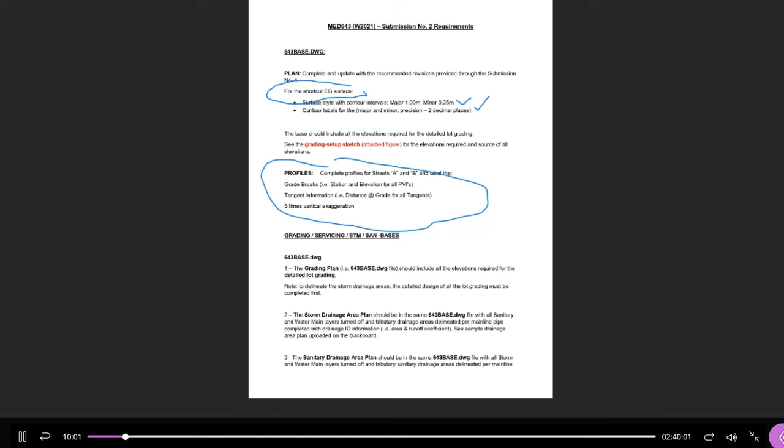So right now we're working on the profiles. So this part here, we're working on this part here together. So we're going to design the road profiles. This here, the shortcut for the surface, that's already done, and the style and the label style is given here. So when you send me your DWG again, I want to see the style for the existing ground surface, right? With a major contour interval of 1 meter, minor contour interval of 0.25, and then a major and minor precision of 2 decimal places. If you don't remember how to do any of this, you can go to the CDA reference files, okay? And that'll walk you through creating surface styles and surface label styles. It's contour label styles. You should be familiar with it, and if not, there's reference documents for it.

So right now we're in the middle of this, right? We're designing the roads. I did street A, I did part of street B, then I revisited A, and now I gotta go back and fix street B. So that's where I'm going to start today. So that's the requirement for the road design. The road design is going to lead to the grading design. We're going to get our front lot corners from a corridor model that we'll create from these finished profiles. So you have to do all the lot grading. The lot grading is important because of the drainage area plans, both of these plans, right? You have to draw the tributary area for each pipe, and I'll demonstrate that next week.

You have to draw the tributary area for each pipe. This you can almost do without the grading, although there is some information from the grading plan, really the profiles. You need the profiles done. So you don't need to do the lot grading for this one, for the sanitary, but you need the lot grading for the storm. You can't do storm drainage area plans without the lot grading.

Okay, so this you can do right now, actually, once we're done the profiles. So once we finish this discussion today, then we can do this. If you want me to show it to you today, if there's time, I will. Otherwise, you have to do the grading plan first so that then you can do the drainage area plan for the storm. Okay, so there's a little bit of order here that's required.

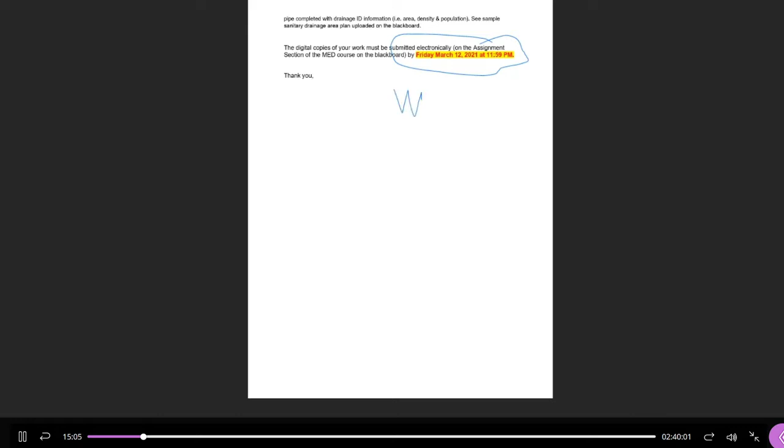Any questions about that so far? Just an overview going forward. Okay, and the due date is right there. Sorry, my mistake. Friday the 12th, which is week 9. Week 9. Any questions?

Okay, so let's get on to today's lesson. Again, I'm going to share my screen. Let me bring this up.

All right, so for the lot grading types, would you need to look at the corners to see if they're different? Do you mean like the flank lots, the ones that are against the roads, Steven? Well, you mentioned that most of the lot grading is the same. Yeah, most of it's the same. There's a couple of exceptions. I think there may be a couple of back splits, but generally they're all split drainers.

Okay. I'll do a little bit of demonstrating of the lot grading design, and I'll give you the parameters for it. Remember the setback from the front, the depth of the house, and so on. So we can talk about that once we get to it. But we're not there yet. We have to finish the road profile design.

Yeah, Claire, sorry, I haven't emailed you back. So if your alignment is short, right? This is what's happening with Claire. Sorry, I don't mean to single you out, but you asked me in class. So if your alignment stopped not at the street line, right? This is the right-of-way line.

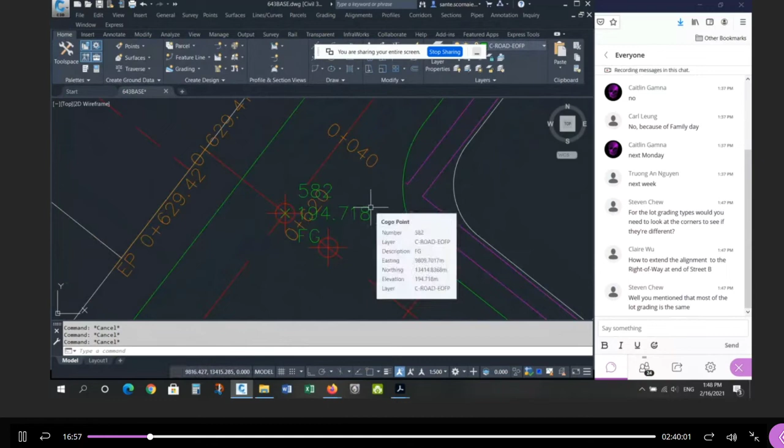Just click on the alignment, go into the grip. Don't touch the labels. Grab the alignment center line, go into the grip, and then INT for intersection. Take it to the intersection of the center line all the way to the street line, and that will extend the alignment, and that should give you the correct station at the end. Okay, that's how you do that, Claire. Sorry, I didn't want to email you. It would have taken me longer to explain it than to just show you, so I'm glad you asked in class. Okay, so try that.

All right, so let's go look at the design again. If you remember, I designed the road profile on Street B here, and then when I projected the design of Street B onto the plan and brought it to the profile of Street A, we found we were too short. We were too low, right? So this is what I designed. That's the elevation based on my work on Street B.

Right, so if you remember the low point, I designed the low point station. These are just the station values. So I designed the low point elevation, which is the point on the profile where this gutter extension is, the extension of the gutter. So I designed this location, and then I interpolated this value from the design, so I know the profile design along Street B, the elevation along Street B at this point is what you see there.

195.658. When I projected this to the plan from this profile, now I'm going to project this point to this profile, which is where we left off last day, and I find that the point is here. It's down here. Okay, that's for reference. There it is. I can't be that low, right? I want Street A to all flow from this intersection all the way to the exit of the site, which is down here, where Street A meets Legerway Drive.

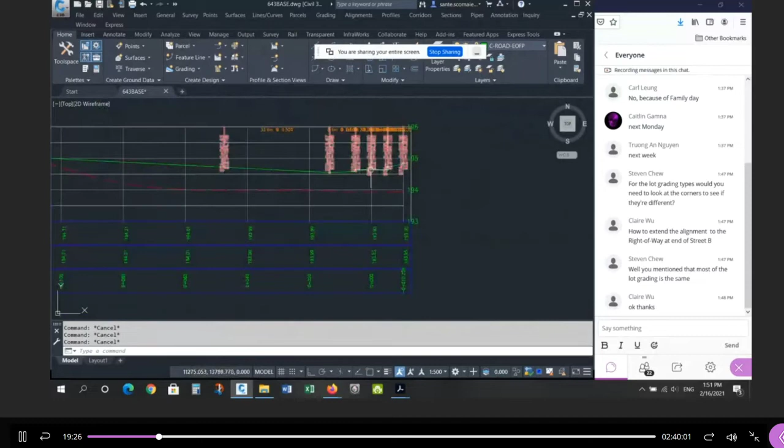We come down to the low point, to the end of Street B, and then all the way to Street B at this end. And we find as a minimum, this crown has to be up here. What I currently designed, it's close, but it's too low. If I lower this, I'm just going to trace this so you can see what I'm talking about. So if I draw a polyline from here to here and then just anywhere here, if I take this design and lower it down to here, node, then the only way to make this work is to have a low point.

Is to have a low point and a high point, right? So if I do this, just schematic, right? If I do this, then I can come down to here and then come back up and match this 0.5% grade, right? This 0.5% grade coming up. If I do that, then I have a low point. I'll end up with a low point here. And I'd probably place it strategically at this perpendicular at this station. So I could put a low point here.

So down 2%, down 0.5%, and then I would come up a 0.5% before I come down. So that would give me a high point here. I'd have a high point here. Whoops. Just want to label it. I'm going to have a high point here somewhere, a high point here somewhere. Oh, come on, sorry. I'm going to have a high point here.

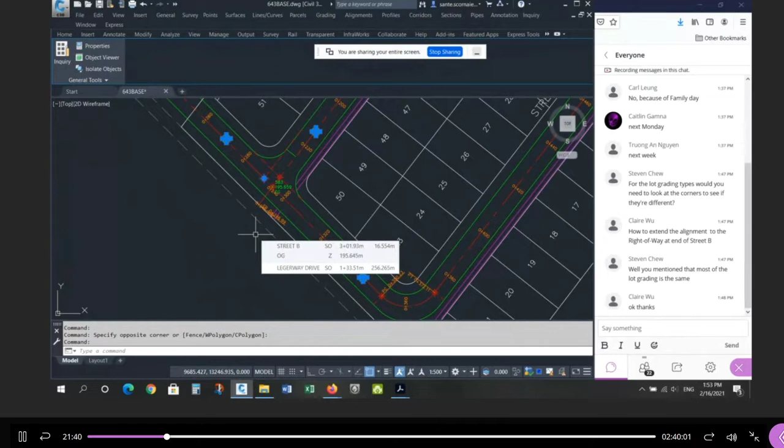So what'll happen when it rains during a storm event that the sewers are over capacity, I'll end up with a big giant puddle until the water gets to a level either higher than this point or this point. This will probably be higher than both of those 2 elevations. So I'm going to end up with ponding on the pavement when it's not necessary.

So if I start my design here and I come all the way up to the intersection without a high point here, if I get rid of this high point, then when it rains and the sewers are full, water will come down and around this way, and from the high point down and around this way, and I'll get positive drainage all the way out here. So I don't want to have an arbitrary high point here where I unnecessarily create ponding on the pavement. So I don't want to put a high point here.

So if we go back to the discussion here, I don't want to have this high point. I want to have it all draining from this intersection all the way down to here. So to do that, I'm going to start here. I'm going to go up at minimum slope all the way to the end. So as an absolute minimum, so that I can avoid the high point, this is the elevation of the road. So now this is too low. So now I'm going to go backwards.

And this is kind of a theme in municipal design. You did one part of the design, and then you're going back to make it all work together, and you find out what I did before on street B isn't compatible with what I need to do on street A. Okay, let's finish the design of street A. What should it be? Okay, it needs to be up here. So let's get rid of this. Let me project this elevation to the intersection, and then take that point in the intersection on the plan and project it to street B, and redesign street B to match this elevation, not the other way around.

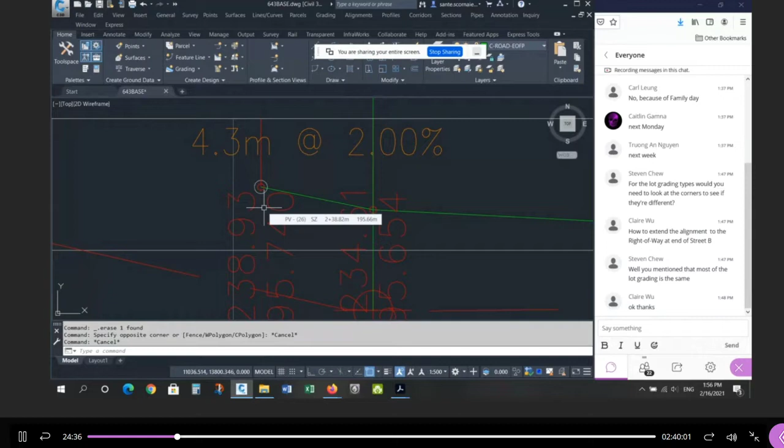Okay, so the process for taking that profile elevation to plan and then from plan to the other profile is this. We've looked at this before, right? So this is no good. This elevation came from this profile. I want a point elevation here from this road's profile. I'll leave this here for reference. You'll see the design from street A is going to be higher than this. So how do you do that? I'll show you. We go back to points, create points, and from this dialog box,

why is it being funny here? Points, create points. I don't know why my dialog box isn't showing. Let me try it from here. Same thing. My graphics kind of not working across here. Oh well, as long as the function works.

So we'll go back to this one, station offset. Pay attention to the prompts at the command line at the bottom. So which alignment? I want street A alignment. Which profile? The finished ground, the design, not the surface of existing ground. I'm going to say OK. I'm going to snap to the intersection of the two center lines. And then it's going to ask me for an offset. Just say 0. I want it right on the mark.

So this elevation that I produced now should be higher than what you see here. Okay, and there it is, right? 74. So instead of 0.66, it's 0.74. So it's almost 4 inches higher, or 0.1 higher, right? 0.08. Okay, so I'm going to get rid of this. I don't want to use that. So now that I have this elevation from this road's design, I'm going to project this to this profile. This I taught you last semester.

I'm going to raise the elevation of the top so I can get rid of these. See, these labels are in the middle of the two lines. You'll see here it's 197. I'm going to change the profile grid. So I'm going to go to Profile View Properties, to the elevations, and instead of 197, I'm going to specify that myself. I'm going to add 3 meters to this, just so the top of the grid is higher. All right, so now the labels are out of the way of what I'm trying to draft. Okay.

So the station location of the low point, this point here, is not going to change. So I still want my low point at this location. So this station is correct, but I want the elevation to match this. So from the low point, I want to come up this way at 0.5%, and from the low point, I want to come up at 0.5% this way.

One technique I like to use, and this is again a tip and a trick, if you will, is to trace this design with just AutoCAD lines and draw my solution using AutoCAD, and then make the design database match. Okay, so here's one way of doing this. So remember, from here to here is 10 meters. This is just interpolated on the intersection. So both this piece and this piece are at 0.5%.

Right, I'll show you here. They're both 0.5%. So from the low point, we're coming up 10 meters. And along the way, we're going to interpolate the elevation of the intersection. Okay? So I'm just going to draw a line from here to here. That's 10 meters long. Okay? What I want to do is move this from here up to here. That's where the design wants to be. Okay? Now on this side, I got a couple of choices.

So now I've got a couple of options. Let me draw a line here. I'm going to trace it, again, I want to draw my solution using AutoCAD lines, and then I'll make the database match. So I'm going to draw a line from this point to this point. So there's our 0.5% up, and then on this side, 0.5% down, right? So this is that high point. This is the curve between here and here, right? It's a little bit steeper for the gutter.

Okay, and then I drew this piece in between at 1.5. Why? Half, 1.5, a grade change of 1%. 1.5, a half, a grade change of 1%. I'm able to avoid a vertical curve. So now I've got a couple of options. Actually, there's more than one option. I'm going to draw that line so that I can have a 1.5% grade. I could raise this up to here and extend this 10 meters, right? I could extend and push this PVI. This PVI, I could push it to here and make this longer than 10 meters in design, right? That's one way of doing it.

Or I can leave this where it is and take this 1.5%, right? Draw it again, take this 1.5% and extend this. Remember this little 10 meter long piece? I can extend that to here and move this PVI and have something greater than 10 meters here. Okay, so there's a couple of options, right? Now, which is the preferred solution? There really isn't one. You can actually do anything in between, right? I can make both of these longer. This is 10 meters. This wants to be minimum 10 meters.

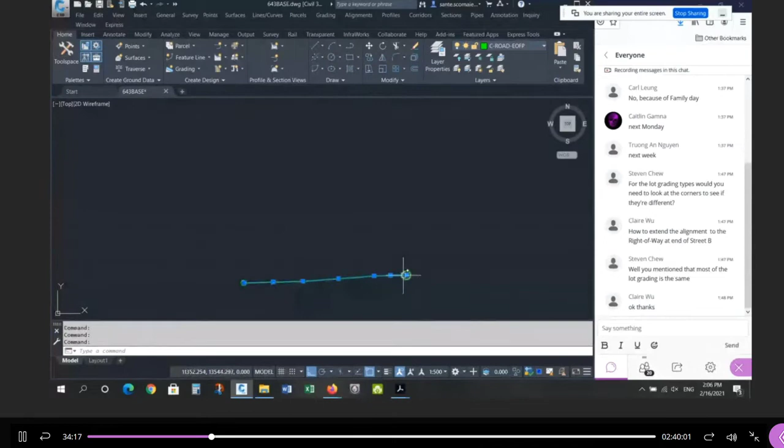This PVI here is going to move over to here. And then this can come up to here, node, and this can come up to the low point to match. Oops, did I do it wrong here? Oh, yeah, this needs to go here, node. Okay, so there we are. So now we have from the low point all the way to here is 0.5%, and then we come up 1.5. So the sum of this and this is more than 10 meters. Okay, so that's the design on this side.

Now on this side, I got to fix this again. And I'm going to do here exactly what I did before. I'm going to come up at 0.5%. So I'm going to trace this. This is 0.5%, right? I'm going to start here and go all the way to here. I'm going to mirror it because this is positive. I want it to be negative. So vertical mirror. Oh, where did it go? Sorry, I scaled it. This line here, I'm going to trace it. So from here to here is 0.5%. I'm going to take it and mirror it to the other side.

Now it's negative. And then I want to fillet this 1.5% grade and this 0.5% grade, right? And now at this PVI, I have 1.5 positive, negative 0.5, a grade change of 2%. So now I have to play that game that I played last day, right? I'm going to make a copy of this and this. This is a PVI with a grade change of 2%. So I'm going to put in 10 meters at 0.5%, this piece here. Right? So this is something I demonstrated last week, but I have to do it again.

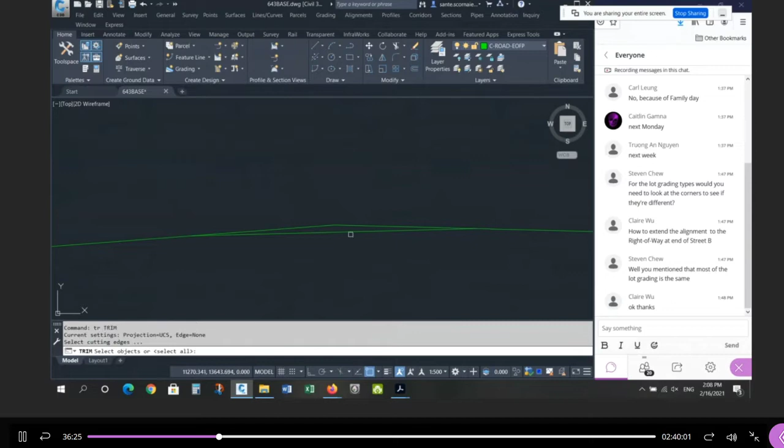Okay, so I'm going to take this one here. I'm going to take this one here. I'm going to fillet it with a radius of 0, 1.5 to negative 0.5. So this PVI has a 2% grade change. This PVI and this PVI has a 1% grade change. Okay, so now I want to put this in relative to these two positions up above. So I go back up here, and I know where this one crosses this one, right? Because I've traced both of them.

So now I'm going to take this from this PVI to the same PVI up here, and that's where my design should be. So now I'm going to take this one and bring it up to here. This one will be over here, and that's it. Don't need this anymore, don't need this anymore.

And there we are. 10 meters between positive 1.5, positive 1/2, negative 1/2. So now I've transitioned. So I moved the high point on this side a little bit. And now I have an elevation that's the same at both intersections. And now my road profiles are done.

Okay, so a little bit of back and forth. Again, it takes a little bit of getting used to. A lot of people don't like the idea. When you're used to doing a problem in math or even in steel design or whatever it is, you kind of start your design, especially if it's hand calculations. You start at the top of the page and you work your way down and you get to the end and you're done and you're happy and everybody's cool.

This kind of work, because there's so many moving parts, because there's so many pieces that have to work together, you can advance the design on one front and find that on another piece of the puzzle, it's not compatible. And it is an iterative process. And I've said this before, municipal design is an iterative process. And you'd like to iterate once, which is impossible.

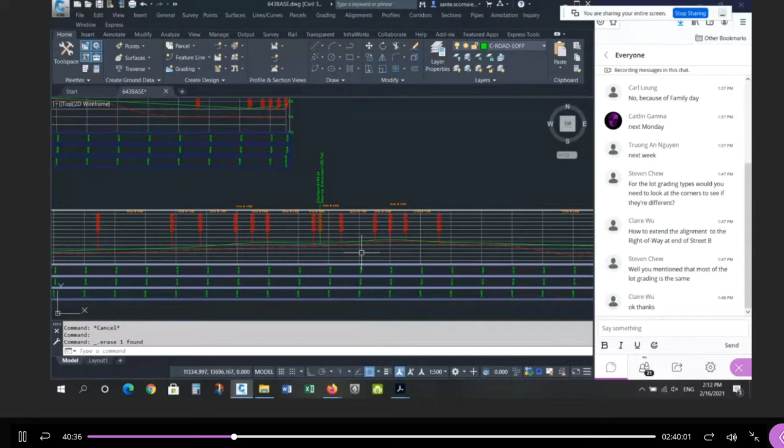So sometimes you get information related to stuff that you thought you knew, and then it turns out you didn't. One of the assumptions I'm making is that this road is built exactly as the design. I'm assuming I'm designing my road against the design of the previous road. Well, this is built now. I hope they built it in the right spot. So sometimes you go back and say, okay, you know what? It turned out that road was actually built 4 inches lower than you thought.

So now I have to go back and revise my design and so on. So there's always information that comes to light, not just the design process, right? There's that part of it, but there's also new information or updated information. You might get a brand new topographic plan with more data and so on. So there's always stuff that's going to make you revisit, yeah?

Until the current data set, everything's up to date. You have all the information you need. Sometimes you start the design not with everything you need, and then you'll appreciate that iterative process. So sometimes there's things beyond your control, and sometimes there's things that you're in control of, but you haven't gotten to that stage of the design yet.

Okay. Any questions? There should be lots, I hope. And again, if you want to unmute yourself to ask a question, you can. You should be able to ask the question instead of type. Claire, were you able to fix that?

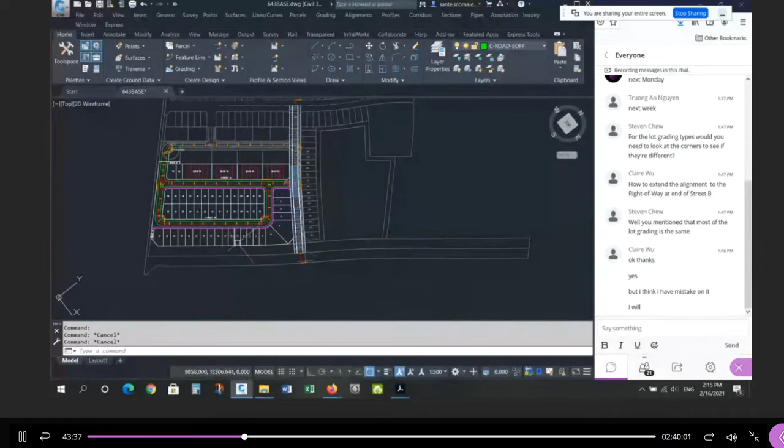So just the same way you splice in the elbows, you can add baselines of other roads or other alignments, more specifically. So I'm going to take this, right click, go to corridor properties, and you'll see in the parameters one baseline. This is called the baseline, where you identify the horizontal alignment and the vertical alignment. And then if you click the plus sign, you'll see the region. That's where you define the cross section. Okay, so you need plan, profile, cross section. So before we add any roads, I need a new cross section.

What's the right-of-way width for our road? Anybody remember? What's the right-of-way width for street A and street B? If you don't remember, measure it. Yeah, 16, right? So I don't have a cross-section with a 16-meter right-of-way, so I'm going to create that. Remember, you need a plan, profile, and cross-section. I don't have cross-sections representing street A and B. So I'm going to go back to my plan view, and I'm going to go over here.

So if you remember, this is the 20-meter wide section that I prepared for Legerway Drive. Okay, I'm just going to cheat. I'm going to borrow from here, right? I'm going to make sure that I have the alignment, the cross-section I need. So under MED, under project files, under Town of Milton, standard, E2, right? So I want to do all this. I want to create my cross section like this, right?

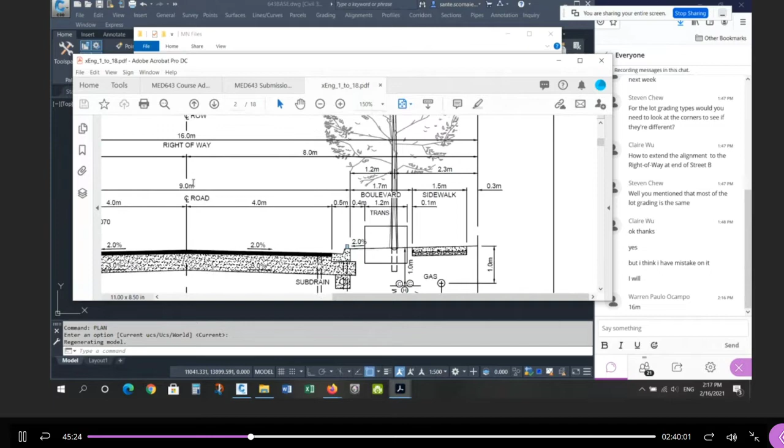4-meter wide pavement. The gutter, remember, is going to be 0.3, 0.05, 0.15, 8.33%, 300%, 0%, and then the rest is all boulevard. And you'll notice this boulevard width is going to be: this is 16, divide by 2 is 8, subtract 4.5 from 8 is 3.5 boulevard. All right, so back to here.

So I'm going to make a copy of this. Now when you copy this, only copy the assembly point, not the sub-assemblies. This is the assembly. All the pieces connected to it are sub-assemblies. So you just need to copy the assembly. The sub-assemblies will come with it, so you don't need to worry about those pieces, okay? So don't copy everything. If you do, it causes a bit of a mess, okay? So just copy the center point. I'm going to bring it over here near street A, and you'll see all the assemblies come with it, okay? If I change these, the pavement has to be 4 meters on both sides.

The gutters are the same. The gutters are 0.3 at 8.33%, 0.05 at 300%, and then the top curb is 0.15 at 0%. So that's the same on both sides. And now I just need the boulevards.

These should both be 3.5, 3.5, up at 2%. And then if I measure the distance from this endpoint to this endpoint, I should get 16. This is my check. That's good. So I know that I've modified this correctly. And then when I click on the assembly point, I'm going to change this to 16 meter right-of-way.

So now I have two cross sections. They both have pavements, they both have gutters, they both have boulevards, but I've changed the width of the pavement, the asphalt portion, and I've changed the width of the boulevard. So now I have a plan for street A and B, a profile for street A and B, and a cross section that's going to be used for both street A and B. Okay, let me go back to my plan. So again, this is a bit of review from last semester. Creating your corridor.

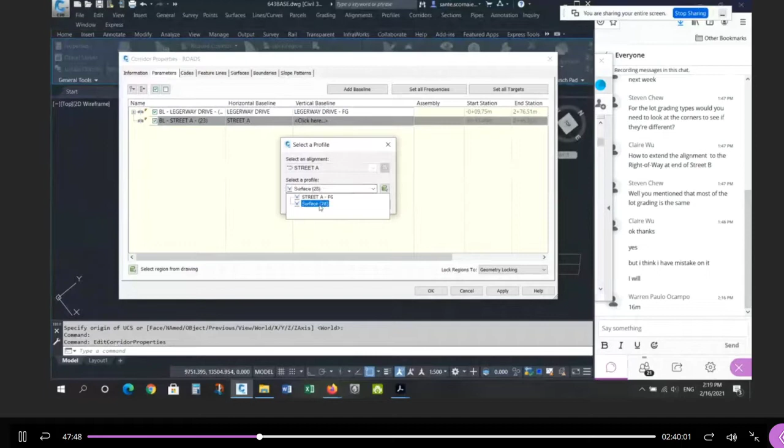Then where it says click here, that's where you take the design profile. Remember, there's always two. This is the existing ground. This is the proposed ground. This is the red dashed. This is the green one, the design one. Say okay. And then to add a region, notice there's no plus sign here. You right click and you say add region. And then you take the 16 meter right-of-way and say okay. And that's street A. I'm going to say okay, but we got to come back for B.

Rebuild the corridor. And now you'll see the corridor for street A. Street A and Legerway Drive together, one corridor model. Street B is done the same way. So we click on here, right click, go to corridor properties. You know how when you have here a choice between FG and surface, if you don't like the surface, you want it to say EG or existing, this is where you change that.

Some students have asked. If you go into tool space, under alignments, under centerline alignments, under Legerway Drive, not the view, that's the grid, the profiles, these are the actual data. Here's where you can change the name. So if you don't like FG and surface for existing, you can go to properties. What I do is this: I go to here, properties, I copy this, Control C, cancel, I go to here, properties, paste, and make this EG. And now I have both.

So be careful. If you change the name, make sure you choose FG for the corridor, not EG. It's a common mistake. Same thing here, profiles, properties, Control C, copy, change the surface property and make it EG. And do the same thing for street B. It's just housekeeping information here. I've got 2 for some reason. I'm going to delete one. Doesn't matter. Existing ground. I must have done it twice.

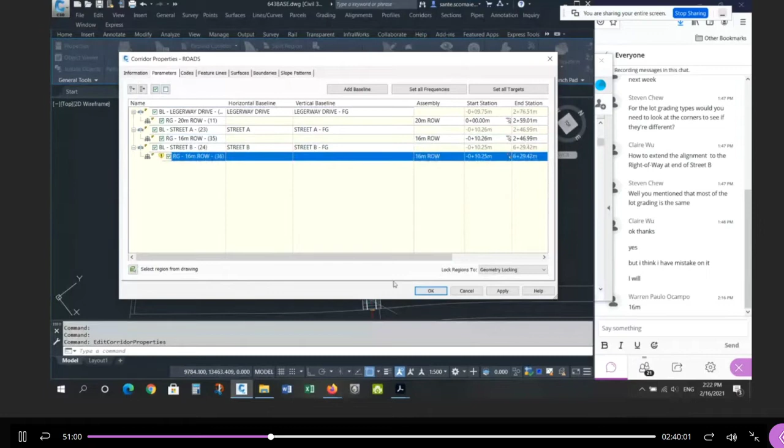And then right click, add a region. And you've got your 16-meter right of way, right? So now you have 3 roads, 3 alignments, 3 profile designs, and 3 assemblies with sub-assemblies. A 20-meter right of way for Legerway and a 16-meter right of way and a 16-meter right of way. Say OK. Rebuild the corridor, and now you have Street B connected.

Okay? So more housekeeping tools. Again, I'm going in and out of this dialog box. You can do everything all at once. Okay? The only time you have to go out and come back in is when you're splitting the regions, which we'll get to in a little bit.

Okay? So you can see here in the corners, they don't look very curvy, right? They don't look very representative of a curve, so we have to go back and change the frequency. So we'll go back to corridor properties and we set all the frequencies. And again, all the tangents should be 3 meters long minimum. Every 3 meters you want cross-section data, and then the curves every 1 meter.

The last 2 for this design are redundant. We don't have any spirals, we don't have any vertical curves, but horizontal curves is going to be important. I'm in the habit of changing this to 3, 1, 1, 1, whether I have spirals or vertical curves. Say OK and watch what happens in the corners. It's going to look more like a curve. Now, even though they're straight lines, it looks more like a curve.

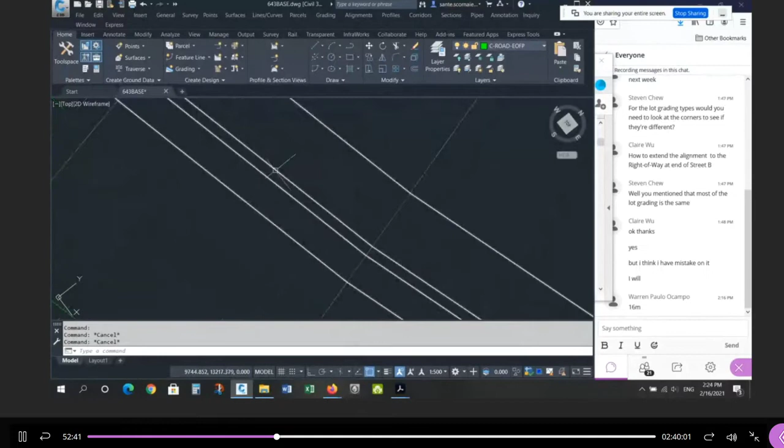And that's also true here, right? The pavement is here. It's actually on the alignment over here. On the corridor, it's out here. So this should actually be right here. Same thing in this corner, okay? So it's not as big a bulge as you saw in Richmond Hill, right? Where it really curved out, where it was obvious. It was really pronounced. Very subtle in Milton, but you still have to deal with it.

I'm going to demonstrate 1. Okay, there are 3. 1, 2, 3. There are 3. You only need to do 2. These 2, the ones inside the site. So you could ignore this because we're not doing any lot grading there. So you don't have to fix this. If you want to, you can, but it's not necessary for the design.

Because remember, all our work is happening in here, right? This is the property line. So this doesn't really need to be up to date. Although, if you want to change it, you can. It's up to you. Okay. You only need to fix these 2. I'll demonstrate 1, and the other one should be a similar procedure. Okay, any questions so far?

Okay, so what I'm going to do next is review. The geometry is different. What I'm about to do as a process is exactly what I taught you last semester. Okay, so before I do that, I need a horizontal alignment for the gutter. I need a vertical alignment for the gutter, and I need a cross section for the gutter. Okay, so let me build those Civil 3D components next.

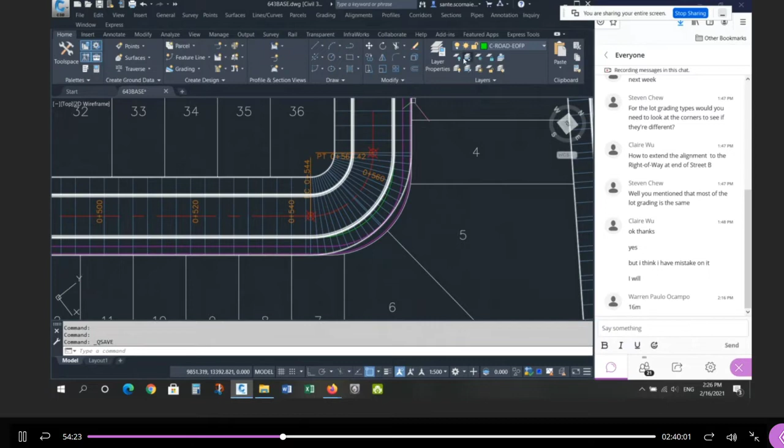Okay, so the horizontal alignment, I'm going to freeze the corridor temporarily. I don't want to see this. So I need an alignment that goes from this dot along the green line to this dot, because that's the zone where the widening is. Okay? Everything over here is typical, and everything on this side of the curve is typical, but everything between these 2 points is where the widening happens.

Okay? So the bulge is on the outside of the turn. This is typical. Between here and here is a constant offset. From here to here, it's widened. It's very subtle. So I need an alignment along the green line. This is the advice I gave you last day. Don't create a horizontal alignment that starts exactly at the beginning and at the end of the widening zone. Make sure you start a little bit before and you end a little bit after.

Okay? Now, because my chainage is increasing in this direction, follow my cursor, right? This is 520, 540, 560. I'm going to have 0 at this end, and it's going to increase in the same direction as the center line, okay?

Just so it's consistent. It doesn't matter, but it's easier to see if you're going the same way. So let me draw a polyline. I'm going to turn my O-snaps to endpoint. I'm going to draw a polyline, not at this point, but just before. So I'm going to use my near O-snap, near. So don't start right there, a little bit before. Doesn't matter, don't go too far, but a little bit before.

Then I'm going to go to the end here. I want to mark the spot. This is redundant. You don't need this spot. Okay, so if you don't want to put one there, you don't have to. So I'll skip it. So I'm going to go to the beginning of the curve. Now this is a polyline. I want to go around the curves, A for arc. And I go to the end of the curve, and then L for line. And I go not to here, but beyond. So near point, beyond. So now I trace the gutter, but it starts before the zone and it ends after the zone.

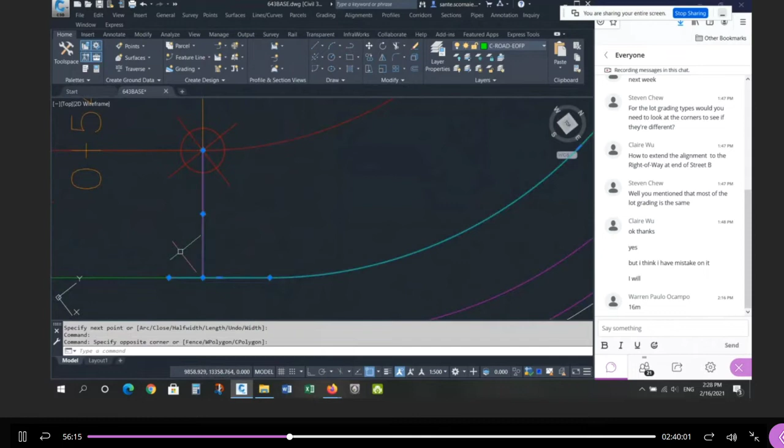Okay, and this is part of what I used to say last semester. Remember, if you have an open net, never aim for the post. You want to do all your profile work well within the limit of the horizontal alignment. You want the horizontal alignment limits to be greater than the profile design within it. You don't want to design them at the edge. You want to be inside. Okay, so that's the alignment of the gutter.

Okay, so I need to create an alignment for this. You have to do the same thing here. Now, here's my naming convention, right? If you start at the beginning of the alignment, there are 1, 2, 3 crescents. So this is the third crescent. So this is going to be street B, crescent 3, and is it left or right? Is this alignment left or right of center? It's on the right side, right? From the center line, if I look in this direction, this is the right side of the road. Okay, so that's the naming convention.

So whatever this alignment name is, it's called street B, copy. So here's the alignment. Alignment, create by polyline. Pick this end. I want 0 at this end because I want positive chainage to increase in the same direction as the center line. Enter. That's correct. See that little indicator, that little arrow? Enter. The name is going to be the horizontal alignment name, crescent, or elbow, or knuckle, or eyebrow, whatever you want to call it. It's the third one from the beginning of the center line alignment, and it's on the right side. Okay? The other ones will be named crescent 1 on the right, crescent 2 on the right. Okay?

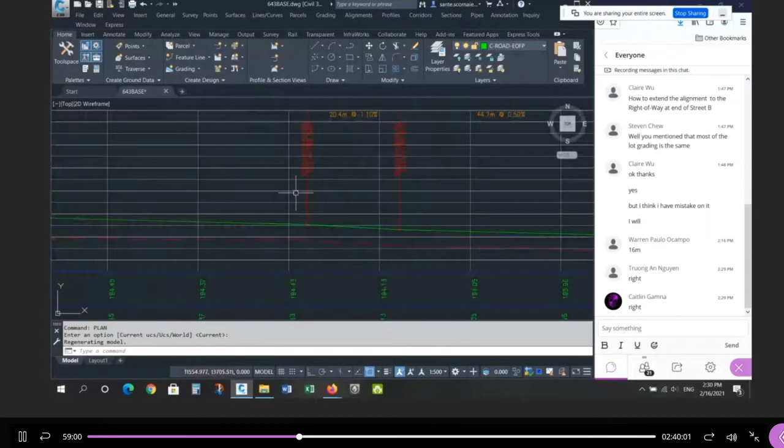So now I know that that elbow on my street B profile is right here, right? This is the last one. There's an elbow here just before the high point coming into the site. There's an elbow here near this high point, right? There's 2. So this is my elbow and this is the elbow I'm working on. There's 2 elbows inside the site. Here's my layout procedure. Don't need any of this crap here, right?

Here's my layout. I'm going to draw my profile. I'm going to assume this is my center line. So anything that's on the right side of the road, I'm going to draw at the bottom. Anything that's on the left side is going to be drawn on top. So now I'm laying out my, and I'll move this for now, right? I'm going to lay out the position of my profiles in a relative way so it's easy to find.

Okay, so this is the center line zone where the widening is, where the elbow is, right? So the bottom of this main road is going to be anything on the right, and above is going to be anything on the left. And then I stay organized.

You can put them wherever you want, but if you lay them out relative to each other in a way that's easy to kind of follow, it makes more sense. So I want to draw the profile of the existing ground of that alignment I just created. So we go to Profiles, Create from Surface. This time I want the crescent. I want the existing ground, add that. I'm going to change the style so it's existing. I get that red dashed look.

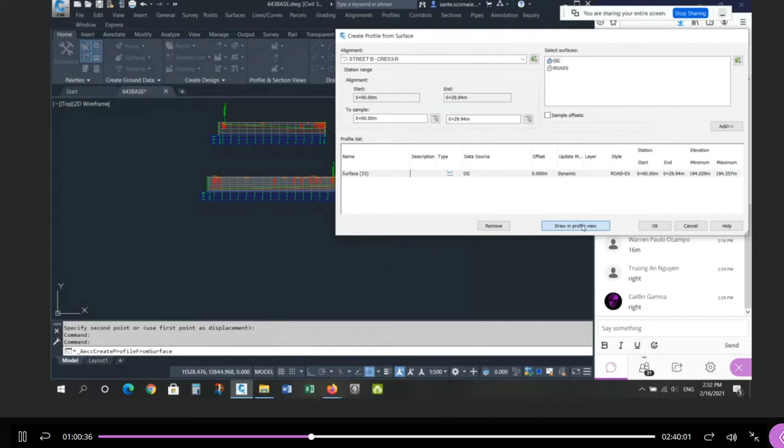And I'm going to draw in the profile view, and this is going from left to right, so I'm going to use left to right for this one as well. Create the profile view, and I'm going to put it directly below here. So there's the existing ground through the gutter. Okay, I don't need these white labels. You get them by default. So that's the existing ground.

Now notice the distance from here to here. I'm going to project down. I'm going to draw a line from here straight down. And I'm going to draw a line from here straight down. And if I take this and I move it from here perpendicular to here, you'll notice that the length along the center is shorter than the length along the gutter, which is exactly what you expect. Right? The gutter length is longer than the center line length. And that's why the center has to be steeper than the minimum gutter grade.

Right? So this is the run for the slope along center, and this is the run for the slope along the gutter from here all the way to here. This is the run on the gutter. Okay. Now I need to project a couple of points from the plan to the profile. Before I do that, I need to have a preliminary sense of what the design surface is for the road. Right. So I need to create the road for the corridor model, which I haven't done yet.

Right. So because it's frozen, I'm going to go back to Tool Space, Prospector. I'm going to go to the corridor, right click, go to Properties. I want to create the surface for the road. Okay, so if you haven't done this yet, I think we did already, but if you haven't done this yet, this is how you create it. Let me recreate it from scratch. I'm just going to delete it, right? So the first time you do this, there's nothing there.

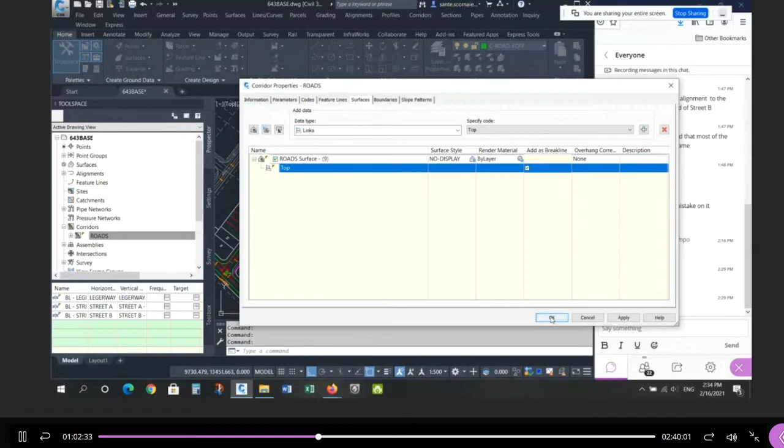So it's 2 buttons. Click this first button, that creates the surface. Click this plus sign, that adds the data to the surface for building. Okay, and use them as break lines. Say OK. Rebuild the corridor. And now you have a surface from the corridor. If we want to look at it, it looks like this. Right, this is the corridor now. Here's Legerway Drive, here's Street B, and here's Street A through here. So keep that surface in mind. Let me get rid of the view. I'm just going to make it no display.

Although the surface is incorrect here, at the beginning and at the end at the gutter, the elevation is correct. So this point here, I'm going to put an AutoCAD point here. And this point here, this is the position on this alignment, this position on this alignment. These are the 2 stations of the beginning and the end of the profile design of the gutter. And the elevation for these 2 points comes from the current road surface. Everything between these 2 points along this alignment is wrong, but at the beginning and at the end, they're correct.

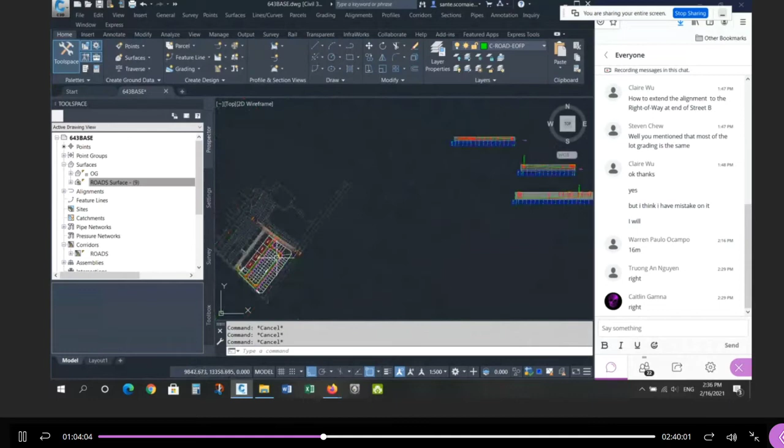So I'm going to project these 2 points to the profile of this alignment, and the elevation of these 2 points are going to come from the road corridor surface model. And that is the station elevation and the station elevation of this gutter profile. And magic should happen. Well, not magic, you did it on purpose. That design profile of the gutter should be steeper than what? Remember the value of what the gutter needs to be as a minimum?

0.75%, exactly. So when we see this profile and its design slope, it should be steeper because we rounded this number up a little bit, right? It should be steeper than 0.75%. So when you see that, it verifies your design is correct for the center line, and it should not be a surprise. If it doesn't come to be a little bit steeper than 0.75, you know you did something wrong here. Okay, so it validates what your design for the center line should be, because now I should see something at least 0.75%. So let's do this.

So we're going to go to project the points. So take this point and this point, enter, bring them over to the gutter profile, click, and now don't accept 0. Set the elevation from the corridor surface. Say OK. And now you've got the 2 points of reference that represent station elevation, the 2 PVIs for the gutter. Let me get rid of this. So all you have to do now is create a design profile that connects those dots.

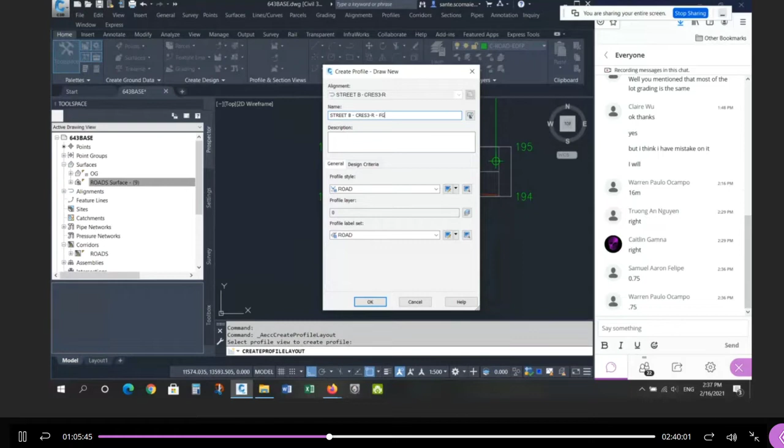So we go to Profile, Create Profile from Layout. I'm designing it. I want to be in charge of what that design is going to be, not the surface, but the layout. Click on the grid, give it a name. So I'm going to give it the alignment name, which I cut and paste from before. FG, the finished ground of the gutter. Say OK. You get this dialog box. We're going to take this PVI generator.

I'm going to start here, node. I'm going to go to here, node. And when I hit enter, you're going to see the labels. Okay, and I'm not crossing my fingers. I expect to see 0.75%, a little bit steeper. And there it is, 0.8%. So that's not a surprise. That's what I expect, because I know I designed the road correctly on center in the profile above.

So now I have my horizontal alignment for the gutter. I have my vertical alignment for the gutter. I need a corridor, an assembly with subassembly parts. So now you have to remember the alignment in the plan, what it represents. And if we go back to the standards, so far, right, this is E2. So far, I built 2 assemblies where the reference point is the crown of the road, right?

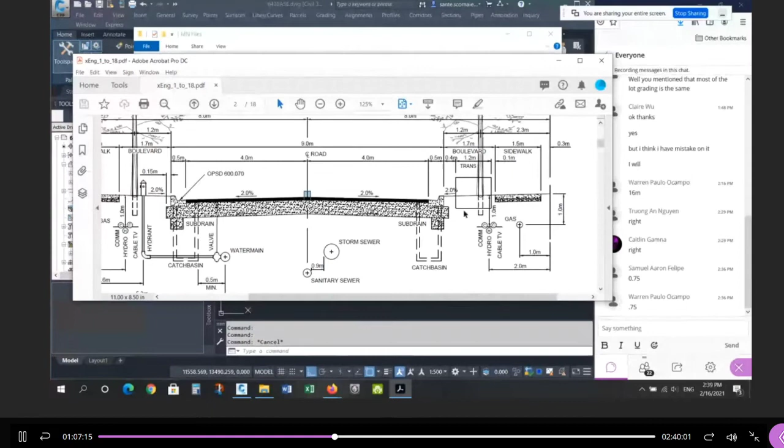Now, the alignment that I drew on the gutter represents this position right here. So I need to build an assembly with sub-assemblies that have an asphalt pavement and a gutter line on one side of center, and then a face of curb, a top of curb, and a boulevard on the other side of center. This is the reference point now, not the crown. Okay, and there's an option. I can use this reference point for the gutter, or I can use this reference point for the gutter, right? Do I put the asphalt on the right side of the gutter or on the left side of the gutter?

Any ideas? Do I build it the right side or the left side? Is the boulevard going to be on the right of the gutter, or on the left side of the gutter? And the reason for that is this. Remember this? The direction of increasing chainage is this way, which means this boulevard is on the right side of this alignment, right? So I'm going to be creating it to look like this, not this. If the chainage was 0 at this end, increasing in this direction, then the boulevard would be on the left. But I'm going this way, so I need the boulevard on the right.

Okay, so you have to be consistent. You have to make sure you know which is the left side, which is the right side, which is something you know in highways, right? Left and right side of cross section, how it's defined. Stand on the road, look in the direction of increasing chainage. Your right hand is the right side of the road, your left hand is the left side of the road. We teach you that for a reason, because now it comes into play. You need to know that this boulevard is the right side of this alignment based on the chainage increasing in this direction, from top to bottom.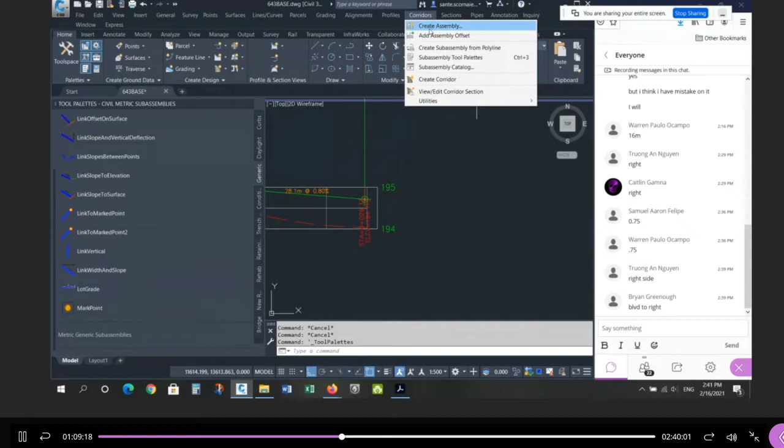So I go to corridors. I go to create assembly. Give it a name. This is going to be called Gutter Boulevard right. Okay, I can't spell gutter, sorry. Say okay, pick a point, it's going to zoom in on it. Okay, so now on this side I'm going to have gutter and pavement. So I'm going to click on link with slope.

On the left side, I'm going to have a 0.3 meter wide, 0.3. Try that again, sorry, link with slope. Now, if it doesn't let you change this value for some reason, this is a hiccup we've had before. This should be 0.3. If it doesn't let you type in here, and it's not letting me type in here for some reason, just accept it. Just draw it and make sure it's on the left side.

So I'm going to draw 2 on the left. 1, 2. They're both wrong, but I've got 2 pieces. Now I can go and revise them. I don't know why that's not working all the time. Some of you may have experienced that as well. So this piece is the gutter. Now I can go to change properties, and now I can actually change the parameters in here. So it's only supposed to be 0.3 wide.

And is the slope positive or negative? 8.3333. Is this positive or negative? It's going to be positive. I'm coming up out of the gutter. So this has to be positive. So there's the gutter. This piece here, I'm just going to change the width to 1 meter. And I'm going to leave it at 2%.

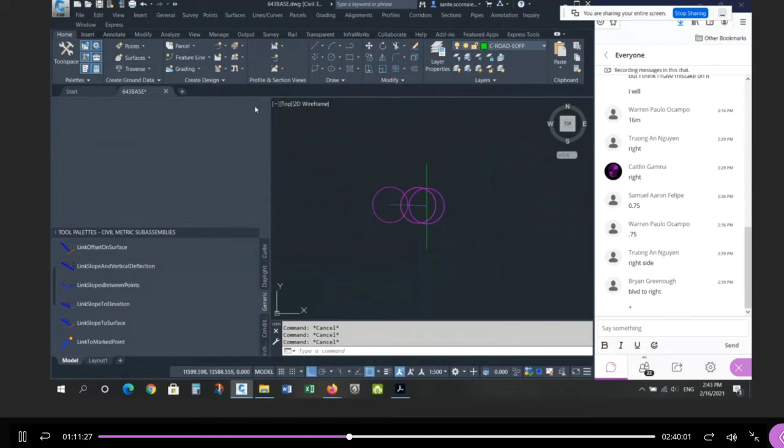And the other thing I'm going to do with this piece is I'm going to change the name. I'm going to call this pavement. And that is the needle in the haystack I need to find later for targeting. Okay, so that's the only one I'm going to change. Now I need the right side, so now I use this again, link with slope, change this to right. But it won't let me type. I don't know why. It won't let me type the number, so just produce it.

I need the face of the, whoops, drew it on the wrong side. Do that again. It needs to be on the right, but it won't let me change the width. So just produce it and then revise it. Don't pick the cyan circle. Start in the center of the road. So 1 there, now pick the last circle on the right. So I need face, top, and boulevard. Face of curb, top of curb, and boulevard.

Don't need this anymore. Change properties of this. This should be 0.05. Now let me zoom in so you can see it happen. 0.05 wide. And the slope is 300. That's the face of the curb. This is the top of the curb. It's only 0.15 wide. It's perfectly flat, 0. And then this is the boulevard, which should be 2%.

At 3.5 meters, same as the typical boulevard, right? Same as this boulevard on a 16-meter right-of-way. 3.5 meter boulevard. And now my reference point is right here instead of the center of the road. The green line is now here on this assembly that I just built. So this should have been 3.5. Let's just check it again.

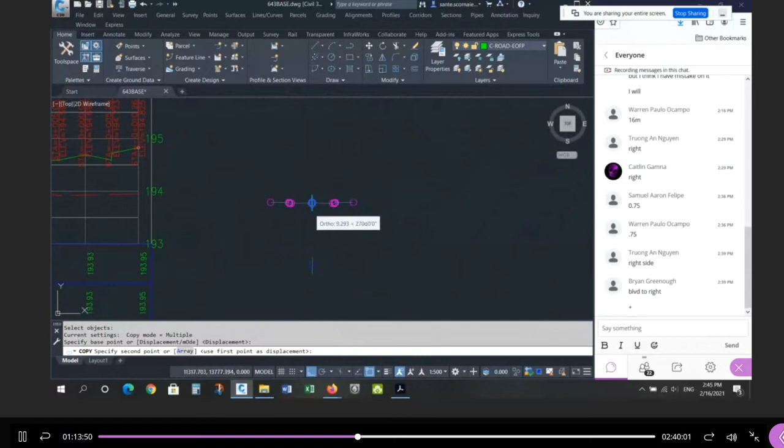Make a copy of this. Move it down here. And I want to drag not the full section around the curve, but the half section, just this. So when I split the region, this is what's going to happen. I'm going to change the name. So it's a typical 16-meter, right-of-way, left side only.

Okay, so when I go around the curve, I'm going to replace this with this. And then on the gutter, I'm going to add the center, the profile, and the cross section of the gutter. Okay, so I've got to splice out the bad and bring in the good. So before we do that, I have to split the regions.

So on this profile, on this corridor, let me show you from out here. I'm going to go in and out a couple times. So once I click on the corridor, right click, go to corridor properties. Okay, and if you go to the parameters, let me collapse all of these. When you click on the baselines, it'll highlight the center line of the one that you've selected. So I'm going to click here.

See, that's the center of Legerway. Here's Street A, and here's the center of Street B. So those are the center line baselines. If you expand these, if you touch the region, you'll see a perimeter of the region, right? So highlighted in blue, that's the entire region. There's the entire region for Street A, and there's the entire region for Street B.

I'm going to splice out or split just in this elbow. So what I do here, you have to do again here. Okay, so I'm only doing this elbow. You need to do both, okay, but I'm only going to do one. So I'm going to take this, I'm going to right click, and I'm going to say split region.

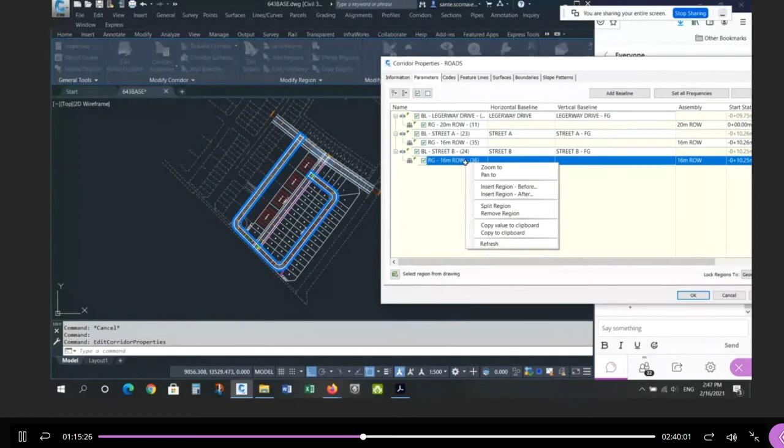Give it a minute, it's thinking, and now you have to snap exactly to this node or this end of curve, right? So this node, NOD, and this NOD at this end, NOD. And now because I'm done splicing, I'm going to hit enter, and it's going to turn what used to be one region into 1, 2, 3 regions. Right, so now I have 3 pieces.

Before you do anything else, complete this splice process by saying OK and rebuild. OK and rebuild. And now you've completed the splicing. If you start making changes immediately after the splice without rebuilding the corridor, it loses its brains. Okay, it's not very cooperative. So I always splice, rebuild, and now I go back in and change the parameters.

So now if you look at this, again, I'll show you from up high. If I go back to my corridor properties, if I click on this, you'll see the entire center line of Street B, but now I have 3 regions. There's this one up to the beginning of this curve. There's the curved piece, and then there's beyond that, the rest of it.

Okay? When you're done, you'll have not 3, but 5, right? One that takes you to here, one around this curve, that's 2. One that takes you to this curve, 3, 4 for this curve, and then 5 for the end. So you'll have 5. I'm only going to do 3 though. I'm not going to split this region, I'll leave that up to you. So this is correct. That's your typical, right? But you're going to fix this elbow, so I'll leave that up to you.

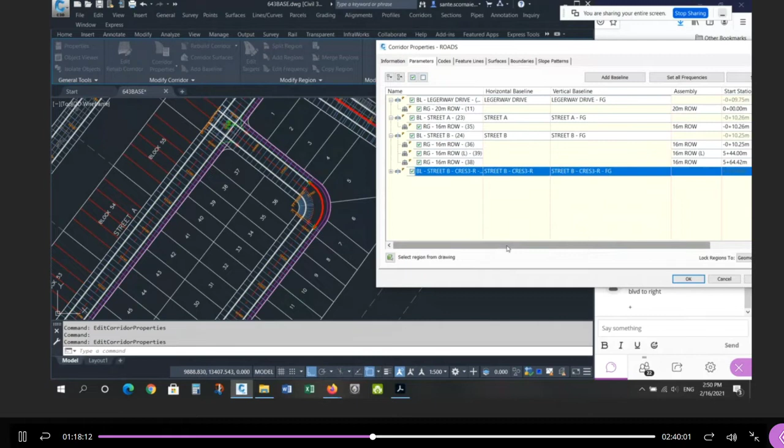The center line of the road, or the center line of the alignment, is the gutter. Say OK. The profile design is the FG, not the surface, right? You can go back and rename this if you want under alignments in the prospector. So it's the finished ground. And then I want to right click, add a region, and drag the boulevard around this. Okay. Say OK. Say rebuild the corridor, and it'll put it in.

Looks crappy because I get a default for the frequency, so I have to change the frequency. Take this again, and I'll update all my frequencies. 3 meters for the tangents and 1 meter each for the curves. Say OK, say rebuild the corridor, and now it looks like a curve. And now you can see the gutter line.

The gutter line is exactly where it's supposed to be. Whereas in this elbow, the corridor gutter is not where it should be. But in this one, it's exactly where it should be. And that's the whole point of the exercise. The last piece of the puzzle is to close the gap here. I want to take that little pavement piece. Remember, I renamed it, and I want to target the center line. I want to extend it horizontally to meet this alignment, and I want to match vertically the profile of street B.

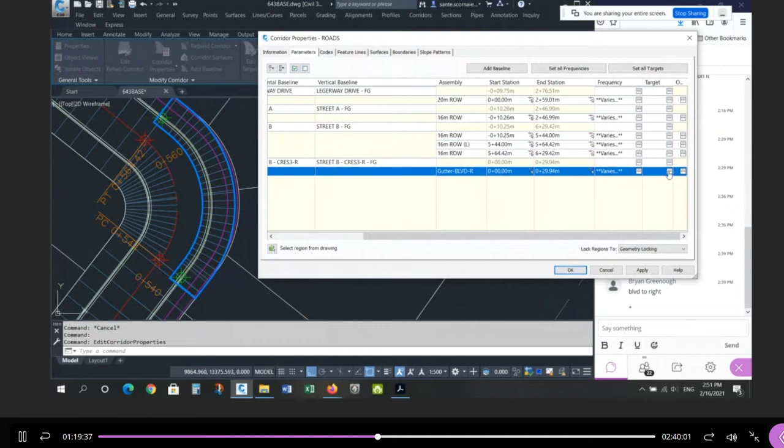And this is the targeting part, right? So back on the corridor, right click, corridor properties. I'm going to go to this region, and if you scroll over, you'll see the targets for this region, right? Notice it's highlighted here, so you know what's going on. I want to click on the target, and I'm going to find that needle in a haystack. There it is, the pavement. That's the piece from the subassembly that's the edge of the asphalt piece, right?

So I want that to have a horizontal alignment target of street B, right, the main road. So add that, say okay, that's the horizontal target. And then the vertical target, same piece. I want the street B center line of road design. Say okay, rebuild the corridor, and it fills the gap. And now I've got a true model of the widening, pavement and all. So if you have any elevations now required for the street line, if you have any maintenance holes, you can get the elevations for the top of the maintenance hole and the center line.

Okay, there's still some housekeeping for the corridor. I'm going to show it to you in a moment. You're going to see some weird stuff, but we'll fix them together. Any questions so far? That's review, and it's worth reviewing. This is the part of the course that I like the most, because I've said this before. I wish I could teach this to you after you've taken it. And right now I'm teaching you something that I know I taught you before, that I know you've practiced before, but it should make a lot more sense this time around. And that's why I like reviewing it again, because it really emphasizes the concept, the idea, how to do it.

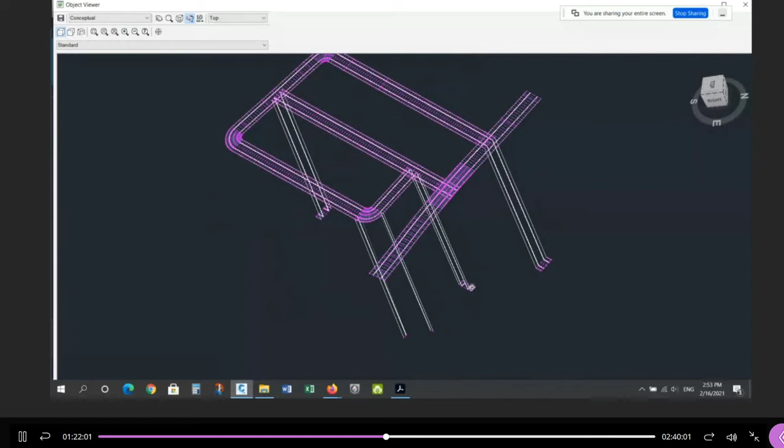There's a spike at the beginning of Street B at Ledger Way, right there. There's a spike at the end of Street B where it meets Street A. And there's a spike at Street A at this end. And there's no spike here. For some reason, there should be, but there isn't. It's fine. And then you have two spikes on either side of your gutter, beginning and end of gutter alignment, okay?

The reason for these spikes is because when you build a corridor, the build range is the horizontal beginning and end station. But because the profiles are designed within that range, right? Your profile starts after the horizontal alignment and ends before the horizontal alignment. If there's no elevation in the profile at the limit of the horizontal range, it's going to assume the elevation is 0, right? So what am I talking about? Let's go look at Street A and you'll see exactly what I'm talking about. So this is the profile.

The elevations for the corridor come from here, but it builds to the limit. This is the limit of the horizontal alignment. Well, there's no design there. So it assumes everything past this point here, because these are elevations, everything past this point here between these two stations has an elevation of 0. And that's why you get those spikes.

So what you have to do now in the plan is grip edit the edge, the limit of the build, so that it comes into the profile range. Okay, so you want to start building your corridor here, not here, right? Or end before you get past this point. Okay, so Street A looks like this. I'm going to take Street A, it's all the way to here, this grip. I'm going to pull it back. It should coincide with the center line of the road, right? This point right here, the node.

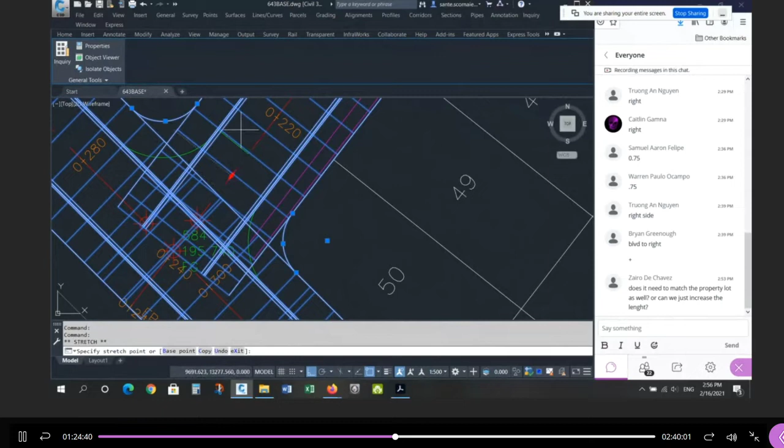We can actually take this grip and not stop it there, but go outside the limit. Like, don't cross Street B, leave a gap, right? Leave a gap between the end of this one and this edge. Okay, as a matter of fact, you can go even further. You can go as far back as long as you don't go past this point or this point, right? So on this side, it's not good, right? I want the model to go past these 2 points. So I'm okay on this side, but not on this side.

So I'm going to grip edit this again and make it a little bit longer. And now I've got coverage here. Whoops, too much, my Osnap. Sorry, let me do that again. Turn my Osnaps off. All right, I'm going to grab this again and bring it forward. Right, so now this point is on the boulevard model here, and this point is on the boulevard model here, and these 2 points, one here and one here, come from this road model.

Okay, now the intersection is not modeled correctly. There is no boulevard across here, but I don't care at this point. I'm going to leave it because all I want this surface for is to get the elevations of this corner and this corner, and this corner and this corner. Okay, so keep them from overlapping, but make sure that all these corners on each of the corner lots are covered, right? In the range of the surface. I'll show it to you again.

The same thing happens here, right? These two. This elevation comes from Street A. This elevation comes from Street A. These two, this one and this one, come from Street B. So if I click on the corridor model, I don't want them to overlap. But I want to make sure that this dot and this dot are within range, right?

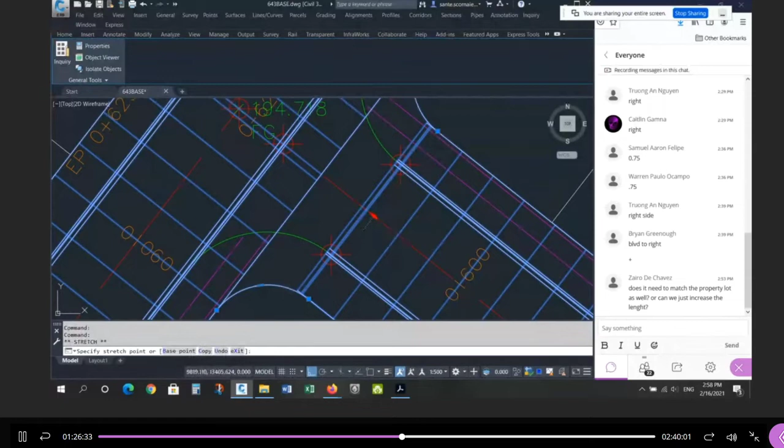So I could go a little closer, I could go a little further, but I can't take this back here. That's too far, right? Now this point is out of range, and this point is out of range. So I want to bring it forward a little bit more. And now from this surface, I can get this elevation based on this road boulevard and this elevation based on this road boulevard. Same thing at the entrance.

Right? I'm going to pull this all the way back to here. Turn my ortho off, sorry. All the way back to here. Right? You don't want the roads to overlap, so you should see a gap, right? Object viewer. You should see gaps, right? You don't want this corridor piece to go across this one.

So you want to leave a gap, but you want to make sure you're far enough so that this point and this point are within the range of the Street A piece. And this elevation and this elevation will come from Ledger Way. Okay, and if I look at this, there's two more spikes. This one here, object viewer.

All right, so I've got to do the same here. Now it doesn't matter that this is here because I'm not doing any work here, but I always like to tidy it up for the same reason. So I'm going to take this corridor and I'm going to grip edit this back to here. Okay, so now there's a gap between Ledger Way and Street B, but you can see the points have coverage.

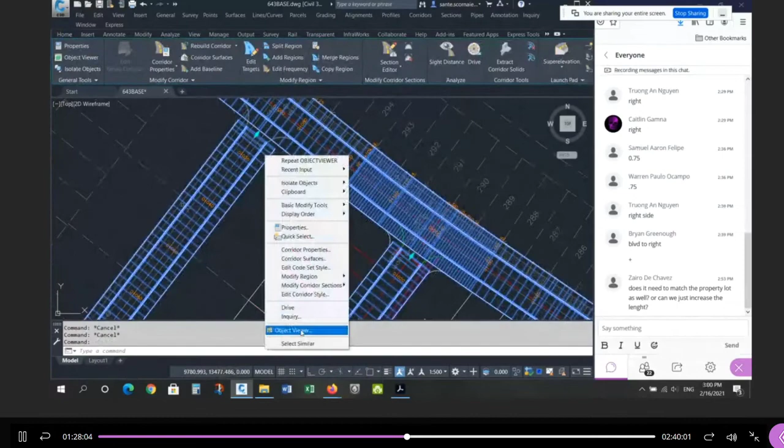This point from this boulevard, this point from that boulevard, this point from this boulevard, and this point from that boulevard. Okay. The last spikes, object viewer, are on the elbow, right? On the elbow. Okay, and again, I'll show you. You don't want this to build. If I click here, see this grip? That's the end of the horizontal alignment. Well, the vertical alignment ends where this green point is, node. So it should stop there.

And on the other end, right, the corridor is building here. It should start building here, node, that green point. So now I've got my build to coincide with the profile range, not the horizontal alignment range. So now if I look at this in 3D, object viewer, no more spikes. Okay, don't forget to save your work on occasion, because if you crash, you're going to be very upset. Okay, so this is almost ready to go.

Okay, you should get this far, plus you need to model this elbow. You need a horizontal alignment, you need the vertical alignment, and if you create your alignment to start 0 here, increase in this direction, parallel to center, you can reuse this assembly, right? Because the boulevard's on the right for that curve as well. If and only if 0 is here and it increases in this direction, that makes this boulevard the right side.

Okay, so I'm not going to do this one. I don't want to waste time in class, right? I've done one, you should be able to do the other. And if you still want to practice, you might as well do this one too, okay? But this one is not necessary for our design. If you don't do this one, I'm not taking marks off. But these two are definitely required.

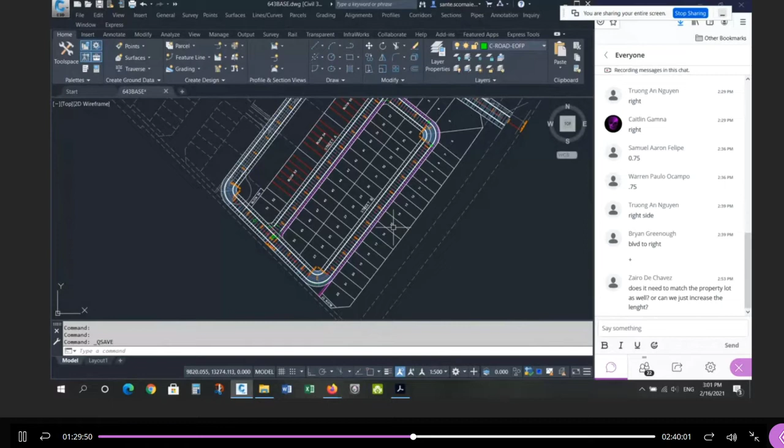The last tip in the housekeeping is, again, what I said before. Remember, this hockey analogy, if you have an open net, never aim for the post, right? Never be on the edge of something. So this is where you do one last thing, and it's obvious in the elbow. You'll notice my surface for the corridor, the edge of the surface, doesn't go all the way to the street line, right? Because this boulevard is a little bit atypical as well. So you have to be careful.

What you need to do on the cross section is make the boulevards all a little bit wider, right? The street line, you'll notice, is right on the edge of the corridor, exactly 16 meters wide. I'm going to take the boulevard, the plane of the boulevard, 2% plane, and make it a little bit wider. I want to extend into the lot a little bit so that the lot corner is not on the edge of the right-of-way, but inside the right-of-way model.

Okay, so now I'm going to go to all my boulevards, and I'm going to do this for Ledger Way as well, right? If you look at Ledger Way, if you zoom in here, this elevation might be outside the range of this alignment. You've got to be careful, right? And it's obvious on the curves. If you go to one of the curves, especially the outside, I need the elevation of this point. And if you zoom in, you'll see the corridor model doesn't go quite that far because I'm mimicking a curve with a straight line.

What's happening is this. If you have an arc and you're mimicking the curve, you're actually getting a bunch of chords. I'm just demonstrating the problem. So if I go polyline, from here to here to here to here, it looks like a curve, right? But if you have a line that goes from here perpendicular to the curve, if I want that elevation, if you zoom in, you'll notice the street line is not where the corridor is. This is a bunch of chords, but now this is out of range.

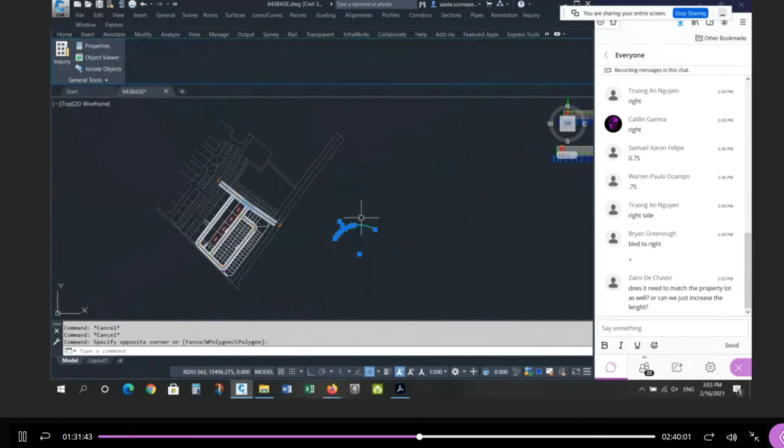And this is typical of the outside of the turn. The inside not as critical, but the outside is a problem. So basically, the short of it is you have to make all your boulevards a little bit wider so that they extend into the lot. That way, the corner of the lot at the front is inside the definition of the boulevard, not on the edge of the boulevard. So we go back to here, and we're going to make these a little bit fatter.

So I'm going to just add about a ½ meter. I'm going to take this, add ½ meter. So instead of 5, I'm going to use 5.5. I'm going to make this one, because this is not symmetrical, I'm going to make this one 5. And then I'm going to go to all of our boulevards, right? This one, and this one, and this one. These are all the same, 3.5. And even the one on the gutter. They're all 3.5. I'm going to just make them all 4.

Okay, and if you do that, and you look at your road, it's now saying, hey, I'm out of date. You changed some of the data, so you have to rebuild your corridor. So let's watch this happen. Let's watch all your boulevards get wider. Right, so I'm going to rebuild. Watch, it's just going to get a little bit fatter. See that? It just went to the outside a little bit more.

Might not be enough. Double check. Did this one get wide enough? No, this one's still no good. Ugh. So I should make this boulevard wider. So instead of adding ½ meter, I'm going to add a whole meter. Okay, and this is something you need to keep in mind. 1, 2, 3, and this boulevard here. Change. And I'm going to go to the boulevard definition.

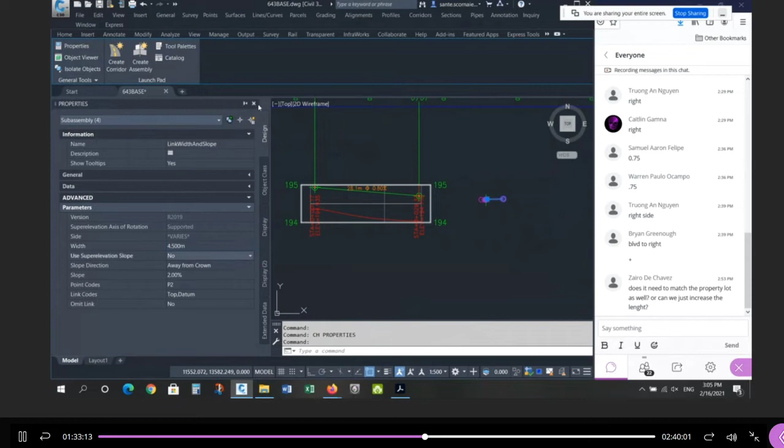I'm going to add another ½ meter. So instead of 3.5 to 4, I'm going to go 4.5, an extra ½ meter, just on the 16 meter right-of-ways. Okay. I think Ledger Way is okay, right? There's the street line. Ledger Way is wider. And let's see it happen here. So let's rebuild the corridor. Rebuild. Watch what happens right here. And now the corner of the lot is inside the limit of the 2% plane of the boulevard.

All right, so it's okay to be a little bit wider than it needs to be. That way you have full coverage, right? Never design to the edge of something. Always look at something within the limits. And that's just a general comment about most of the work we do.

Okay, when it comes to here, I'm going to give you a preview. This boulevard must extend all the way to this point here, because you want a 2% plane in this triangular area. So this boulevard needs to be about this wide from the back of curb, once the back of curb is established, all the way to here. This elevation, where my cursor is, comes from the corridor model of street B. This elevation comes from existing. We'll deal with that later. But you have to extend all the way to here.

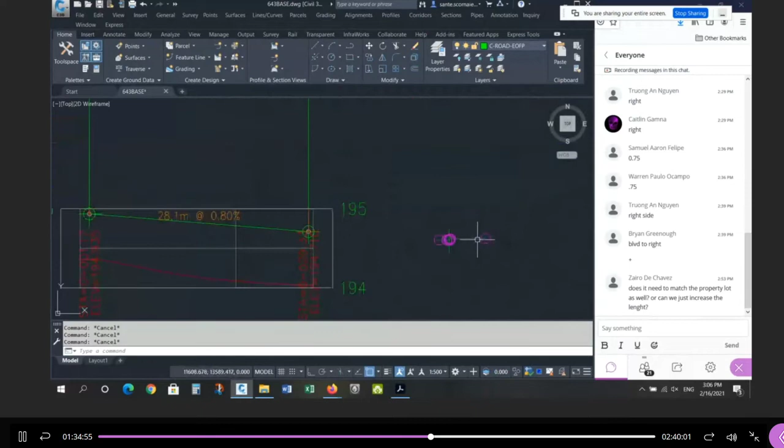And that's a bit of a head scratcher. I'm going to leave that one up to you. Okay, so make sure you extend this boulevard wide enough to get to here. And because you're coming around the curve, you may only have to make this wider, because this is what you're going to drag around that curve, right? You don't have to worry about the typical sections. You can leave these ones alone. All right, any questions about that?

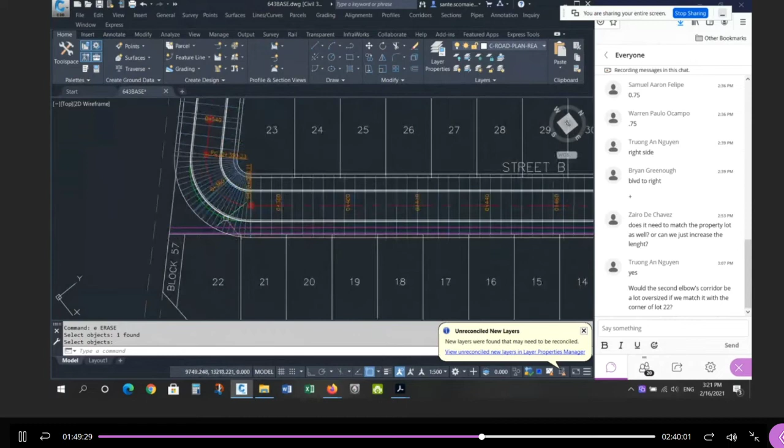What I would do, Truong, is the same way you did this, I would do this. So you're going to have to split the region, replace the full section with a half section on the inside, and then add the baseline, the profile, and the cross section for the elbow. And then all you need to do is make this boulevard long enough so that the corridor model extends all the way past this point. So the corridor model, right, this boulevard has to get wide so that you've got coverage here. This point has to be within the limit.

Now you only need to widen the boulevard of the elbow, right? Not the typical, right? Don't widen these ones, just this one. It'll widen this one as well, but that's fine. Okay, does that answer your question? Okay, so you'll see when you splice this one in, the boulevard won't be wide enough. It'll look something like this, a little bit wider, but it won't be wide enough. Okay, so I'll leave that up to you. I think I've explained it, but you need to figure that out.

All right, so now to do your lot grading, you need that condition, right? Once these are all done, I don't need these anymore, right? These were just some of the tools I used to do my profile design. I'm going to get rid of my corridor model. I'm going to freeze it. Okay, so to do the lot grading now, I need the proposed elevations at all my front lot corners. So I prepared a layer, right? This is something you need to do. This is review again from CDA.

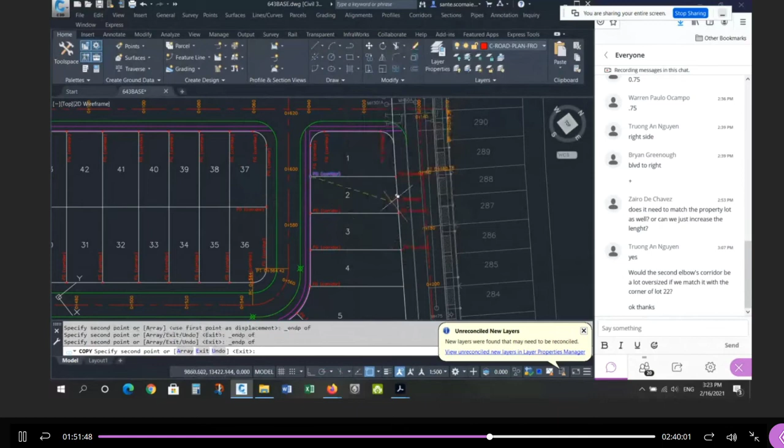You can make a copy of this and put it here and here and here and here and here. Okay, so all those street line elevations. Oh, I missed a couple. Here, I could put one here, and I can put one here, and I can put one here. Okay, so these are all front lot corners that you can get from the corridor model, right? Including this one, right? So that's why you have to be wide enough here. Right, all your front lot corners.

So there's a diagram of all these front lot corners in a PDF that was given to you by Professor Neruzzi. So it looked like this, I believe, right? So he gave you this. So you can see everything in red, right? FG comes from the corridor. So anything you see in FG. Now, because we have a corridor model for Ledger Way, you can actually do the same. So this blue one, this blue one, this blue one, and this blue one, instead of interpolated, you can get them from the corridor model. Only if you modeled Ledger Way on the corridor model.

If you didn't do that, then you'll have to do what you're doing back here, because we don't have a corridor model for this road. Okay, so this now, if you have Ledger Way, can all come from, even this lot corner, this can come from Ledger Way, okay, because it's part of the edge of Ledger Way. But everything else inside on the street comes from the corridor model. Okay, so once you create the layer, right? So I created the layer for the front lot corners. I placed all the points where they need to go, right? And I already rotated them. You don't have to, but you're going to eventually have to rotate them, right?

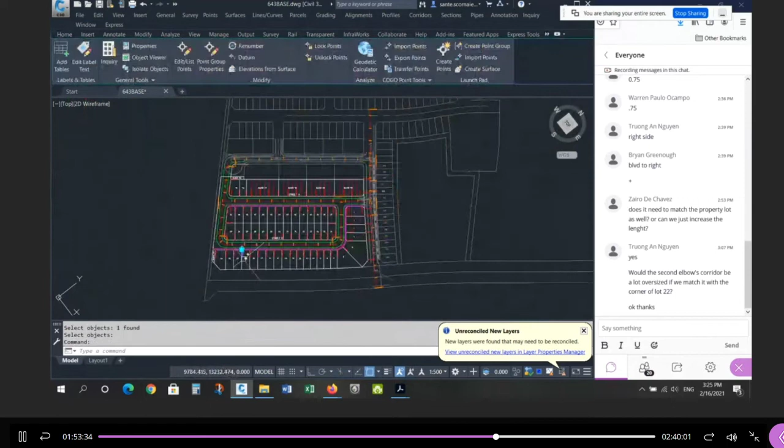So what do you do? You click on one. You right click, select similar. That selects all the street line elevations. So this is from my legend. I don't need that one. Sorry. Get rid of you. Okay, so I take that, right click, select similar. So these are all the elevations at the street line that come from the corridor model. So now I can just right click, elevations from surface, and then choose the road surface model and say OK. So now all those elevations have the correct elevation from the corridor model. Okay? I'm not showing them to you because you're going to get whatever you get. So I'm telling you the source.

So it's up to you to get those elevations from that source. Okay? And those numbers are what they are. Okay? So I'm not going to show you what they're supposed to be. I want you to determine them for yourself. So you'll see them. Right?

So my point label is just a constant that says FG corridor, right? Instead of the actual elevation. And they all have a description, FG, and they're all going to be in my point group called FG. So I'm going to create a point group, properties. I'm going to create a point group. It's going to be FG. I'm going to include anything that says FG.

And what's it going to look like? It's going to look like a point, and it's going to look like an elevation. Okay, so if you're a member of this group, it's going to look a certain way. Use the styles that you had in CDA. Okay? And if you don't remember what they are, go back and look at your CDA reference documents. Right? So these are all posted online.

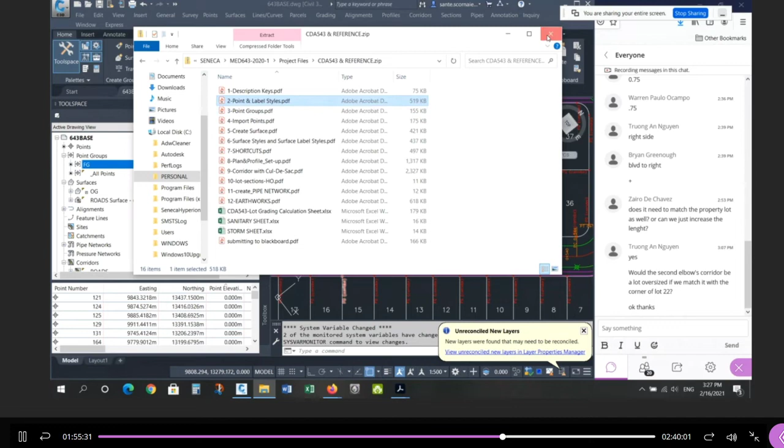So if you go to project files under the CDA reference stuff, you'll see in here, view details, right? How to create points and label styles. So that's how you do it. And what do I want to use? Go back to CDA, whatever the styles were for proposed and existing that you used last semester. So you can open up your old drawings, look at those, or you can look at the assignments from last semester. Okay? So proposed is proposed and existing is existing, just like before.

Okay? So I expect you to be able to create the groups, create the styles, make sure the points are in the group and so on. Okay? So that's the front lot corners. And notice I did all of those elevations for all the streets in one shot. And that's why, and I've said this before, that's why I have one corridor model. And then I have one corridor surface, and I can create all my elevations at the front lot corners and get all the elevations once and for all at one time.

If you have a corridor for street A, and you have a corridor for street B, and you have a corridor for Ledger Way, and you have a corridor for each of the roads, then you have to do that function for each road. And you have to have a layer for the front lot corners for street A, and then you need a separate layer for the front lot corners of street B, and C, and E, and Ledger, and whatever else you have.

This way, you have one model for all your front lot corners for the entire subdivision. And that's why I have only one corridor. That's why my corridor is called roads. All the roads, one model. Okay? So that's the advantage of it. That didn't make sense last semester because we only had one road, but now we have two.

And you can see if you have 3, 4, 5, 6, as many as you have, put them all in one corridor model. The only limit to that statement is if there's a lot of roads and the file starts to get too big to manage, then you might want to create two road models, a north and a south, or an east and a west part of the subdivision. Right? So then you may have to break it up into two parts and into two different drawings because the file size is getting too big. Okay? We're not running into that because I'm keeping things relatively small in terms of the data set.

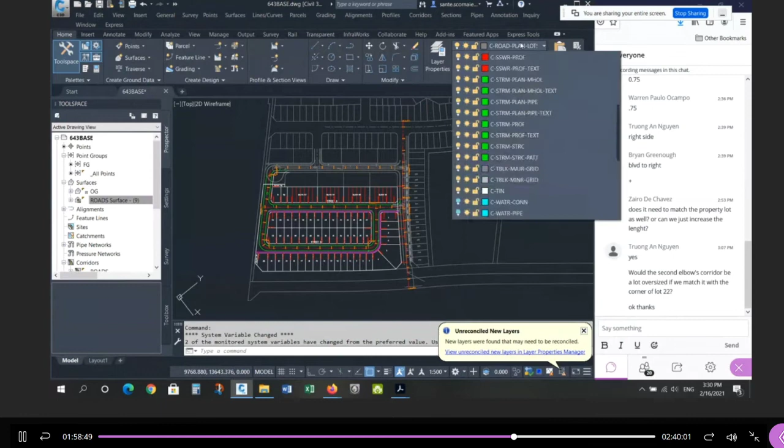First thing you want to do is create a layer for existing elevations. So I'm going to create the layer for existing elevations. It's called C Road Plan Lots Existing, EXTS, right? Remember, it's always 4 letters, dash 4 letters, dash 4 letters. So that's the current layer.

Then I want to create a point. When I do this, the points are going to come in on the current layer, and I want to put them in a certain group, okay? And I'll do that after. Or I can do it during the import command. So I can go to points, create points. This button here. I want to select the file name.

It should be in where I download, on my desktop, under my course code, under the downloaded files, under project files, there's the file, right? If it doesn't come up, make sure your file type is set to CSV. If you set it to all, you'll see all the files, then you have to go looking for it. But if you want to narrow it down, change your file type to CSV, comma separated values, open it. So there's the file.

The file format I'm only ever using is this one. There's only the one I ever use. There are others, but I always use this one. Point number, northing, easting, elevation, description, comma delimited. You'll see a preview here.

Okay, and now when you import them, you can actually put them directly into a group through this function. So we can go to add points to the group. And instead of FG, we're going to create a new one using this button here. It's going to be called EG for existing or EX for existing. Say OK. And it'll put them in the point group based on the point numbers. I'll show you that after it's created. Say OK. And it imports the points. And you'll see this fuzzy thing around the perimeter.

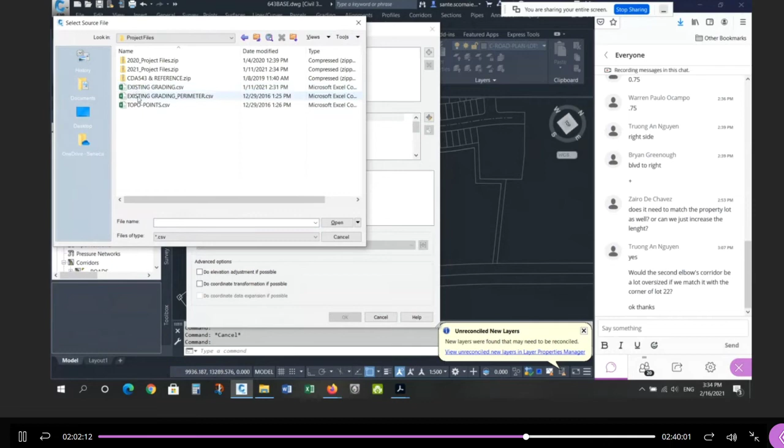Okay, do that again. Where's the file? Hang on a second. I want to keep an eye out here. Okay, so where's the file? So once I downloaded it, right? So download it with all your files. I actually have it on my local drive, so it's under personal Seneca MED project file. So it's going to be called this existing grading perimeter. Say open. Choose the file type. The format is the same. And there you've got everything, and you'll see they're all EG.

So you have a couple of choices here. You can add it to the group called EG, and it's going to do it by point number range, which is fine. But I'll show you how to change that if you want. All these are called existing. I say existing, what I really mean is the previous design, and I'll show you the PDF it comes from.

I'm going to say OK, and now it's going to ask you if the point numbers match. You want to check it. Just say apply to all duplicate point numbers. Say OK, and you'll see this fuzz around the perimeter. See those points all around the perimeter?

Select similar. You're going to get the previous design, and we're going to pretend they're existing. Right? You have to match whatever was there before. Okay. To get that information, where did those numbers come from? I'm going to give you some information here where the source is. So if we go back to, you can download this file from the website under the grading model.

Right? You can see the entire subdivision, but the grading plan. This is available for download now. If you zoom in on this design, you'll see. Let's look at this one. On the perimeter, you'll see proposed, and then in italics, existing elevation. So this is the proposed design, this is the existing. This is the proposed, this is the existing. I digitized all the proposed.

03, oh, that one's wrong, actually. It should say 20, not 02. Good thing I checked it. This one should say 46. I think I have a typo. This one should say 46. Yeah, so this one came in. It's actually wrong. This should be 02. Should change that. The rest, though, come from that source, right?

So if we look at this corner, you should see 377 and 410. Back to here. What's the chances of zooming in on a mistake I made? That's what I did. Okay, so you can see here 410 and 377. 410, 377. So I digitized all the points around the perimeter, and I obviously did this one wrong. So it should be 02, not 20. Right? So I've checked it, but I obviously made a mistake.

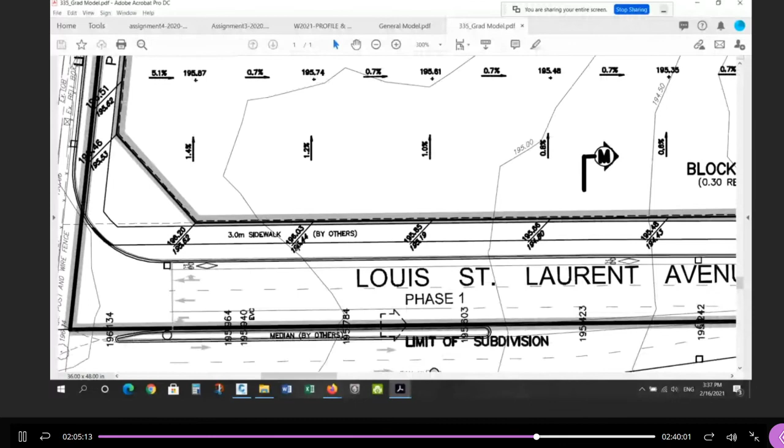So, oh no, it's right, 20. That's correct. 20, I did it right. 46, 20, 03, I did it right. 46, 20, 03. No, it's correct. All right, so those are the perimeter grades. So I took the time to digitize. What I did is I placed all the points in the plan at the correct place based on this drawing, and I typed in all the elevations.

So basically, I digitized the perimeter elevations all the way around the site, created a CSV file. So you don't have to do that. I've done it for you. All you have to do is import it. So when we do our design around the perimeter of the site, it has to match those elevations. Okay, so that's all you need to do is import them. So that's the design. What we need to do now is respect that elevation across the limit, or across the edge of the site. So to do that, we're going to interpolate.

Okay, so I'm going to show you one more tool, which I didn't show you last semester. This is what I told you to do last semester. Watch. So I want the elevation on this corner and this corner, and it's going to be between these 2 points, because these dark blue points are between these 2 points. So these two are going to be interpolated between these points. So I'm going to turn my OSNAP to node and to endpoint. And here's what I taught you to do last semester.

First thing we do is go to inquiry, and we list the slope. And then P, enter. The slope between here and here in this direction is negative 0.9, right? So from here, it's negative 0.9 to here. So what do I do? I use the distance command. I'm going to go from here, endpoint G minus 0.9. Distance, I need the endpoint again. Enter, enter, enter. And do it again from here to here, G minus 0.9. Distance, pick again, enter, enter, enter. So now I've designed these two.

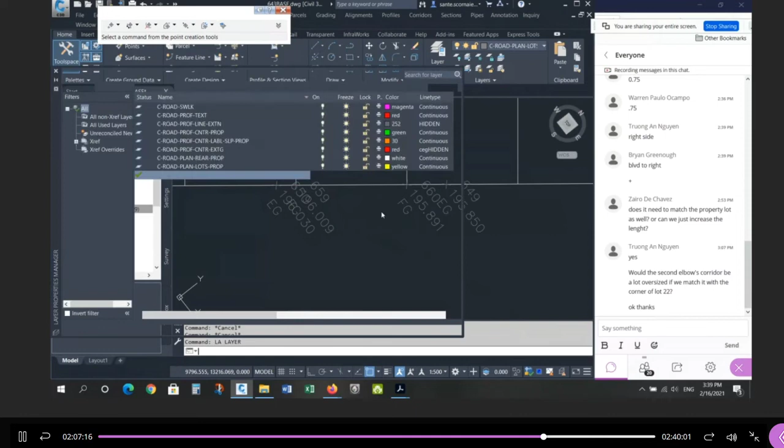Okay. Now I want these interpolated values to be on the proposed rear. Even though they're the same, right? They're matching existing. I'm not going to use lots proposed, but I want to use rear proposed. So I want this the current layer, right? I'm going to make this blue, right? Just like the drawing, right? So these should be on this layer here.

Just going to draw a line and match the property. This matches these, right? So these are interpolated. You can update your point group, and they should also be FG, because I want my front lot corners. I want my front lot corners to be on one layer.

I want these interpolated values to be on a different layer, but I want them to have the same description so that they all go into one group, proposed grading. Okay? So that's how I taught you how to interpolate last semester, right? Measure the slope between 2 points, and then you could use that slope in between.

Okay? Watch this. Here's the new tool. This is the next tool I want you to see. I'm going to move these over. Okay. Here's the other tool, right? So in here, points, create points. So I taught you how to use the high-low and the distance command, these two. Okay? Those are the ones you used almost exclusively last semester. Here's a way of interpolating directly. Not this button, but the next one to the left, by location, relative location.

Okay? This will interpolate for you. So click on that and pay attention to the prompt. What's the first point? The order does not matter. If I go from here to here, it's going to be negative 0.9. If I go from here to here, it's going to be positive 0.9. So the first point doesn't matter. Okay, so pick one, pick the other, and then interpolate.

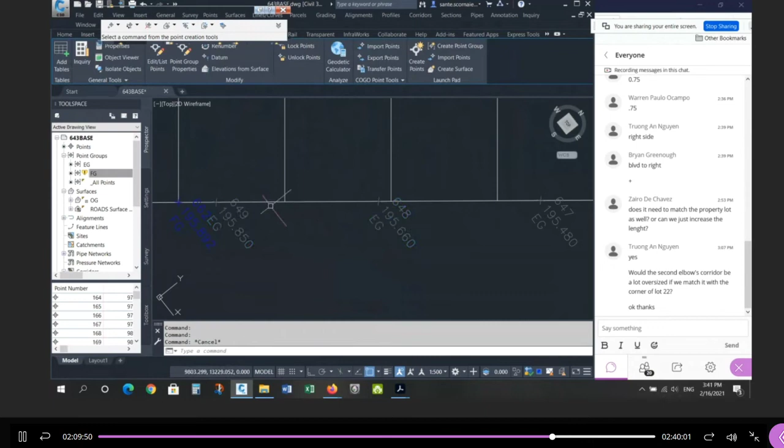Okay, so let me do it again. So here's this. You look on either side. Look to the left, look to the right. This point's in between, so I have to interpolate between these two. So again, the command is relative location. Click, enter, pick the spot, enter, and it interpolates. Right? These two come from between these 2 points. So I'm going to interpolate, relative location. So I'm going to pick, enter, snap, enter, and I'm done.

And you're going to do that all the way around because you need to know the elevation of all of these lines at the back of the lots. Once you have an elevation at the front and you have an elevation at the back, you're going to go back to what I taught you last semester, right? What's the front elevation? What's the back elevation? What's the length of this line? If you have to use the spreadsheet, you remember the lot grading spreadsheet, go ahead and do that. You'll find most of these are going to be simple split draining lots.

The only exception is going to be, I think, in this corner here. When you go around this corner, I think this, and this, or maybe just this, I'm just guessing based on my past design of a different layout. You're going to find around this corner here, you're going to have maybe some back splits, right? So they're still split draining, but back splits. But the rest of the subdivision is going to be simple split draining lots. 2% up from the front, 2% up from the back, or 2% up at the front and 3% up from the back. Okay?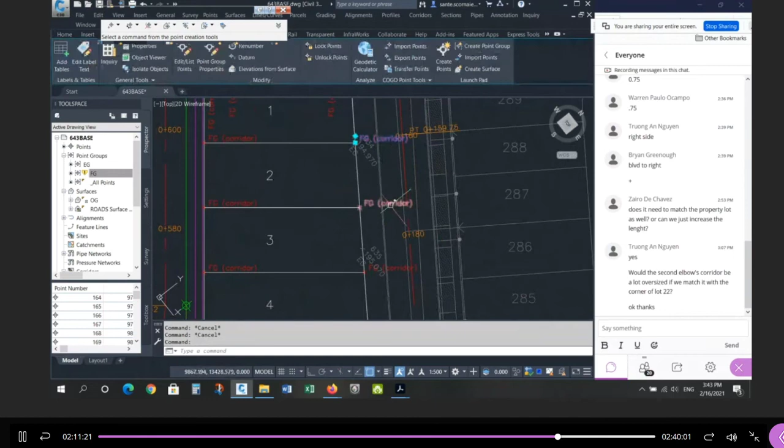So you have to go and interpolate. The only exception, like I said, is over here. These elevations could come from the corridor, but if you want, you can interpolate. Right? Remember, I got from the corridor. I'll give you a hint. Right? Lot 2. I'm going to list this. It'll tell me the elevation without showing it. So the elevation of this point is 195.03. That comes from the corridor.

Let me interpolate and see if I get that same number. Should be close. Okay? So I want to interpolate between this one and this one. Okay, so points, create tools, relative location. So from this existing, enter, to this existing, enter, this endpoint, enter. So now it interpolated. That I got from interpolating. This I got from the corridor. Let me just check it again, because the label's not showing. So I'm expecting to see 195.03.

I've got 195.00, so it's off by about 3 centimeters. So my corridor elevation is different than this interpolated value by 3 centimeters, which is approximately an inch, right? It's not that big a difference. If I have a corridor model, I would go with the corridor model, okay? And the reason for it is, in this location here, there's a vertical curve.

So if you look at the vertical curve, and I'll show you on Leger Way, it's not really a vertical curve, but I'll show you. Okay. So if you're interpolating along here, you'll see this hump, right? So what happens on the street line is, if you project straight up, I'll get an elevation at a front lot corner here, and another elevation at a front lot corner here. And if you interpolate between these 2 lines, you're going to miss the details in between.

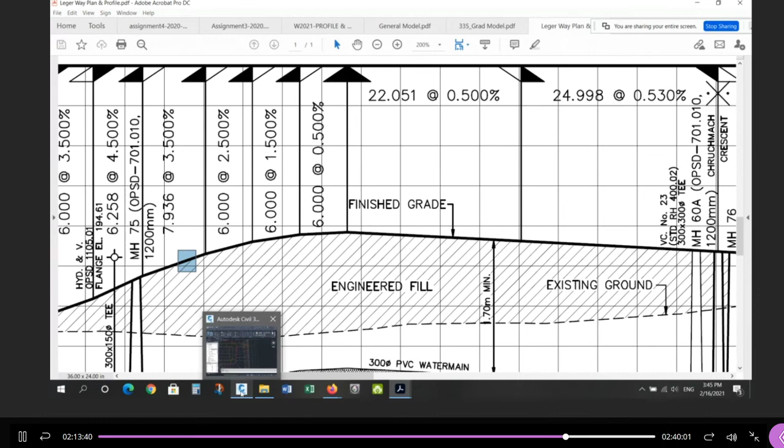Okay, and let me show you. Let's get away from here. Okay, this is where that curve is, right? The high point. Let me show you here. I'm going to interpolate here. This one should be more accurate. Okay, so I want to interpolate between this point and this corner here. I want to see how close I am to this one. So I'm going to interpolate between this existing, enter, on the end point of this curve right here, enter.

So I've interpolated a value of 478, right? 194.78 if you round that. What's this one? It came from the corridor, right? So 478, 473. So it's off a little bit. Okay? So it's close enough for lot grading, but there might be a slight difference.

Again, in the intersection, and let's go back to it here, which is approximately where these services are, right? Right in here, it might interpolate between here and here, and it might be a little bit off. Okay, so be careful. It might not be exact. They're close. It's not like they're planets apart, right? We're talking about a couple of centimeters, 2-3 centimeters, okay?

In this case, when you have Leger Way, you have a corridor model, and you have the points from the grading plan, the design points that should have come from a corridor model. If you have two sources, I would always err with the corridor model. Start with the corridor model and check it against the points if you want to interpolate. Okay, but they should be very close. If I had to choose one over the other, I would go with the corridor model, not the interpolated one.

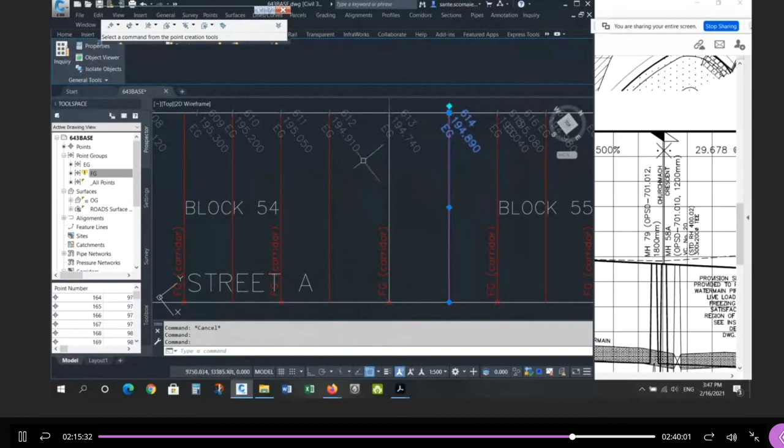Right? And where you have no corridor model, you have to interpolate. So you have to interpolate everything across the bottom here, and everything across the top here. The nice thing about what's happening up here is the proposed points are actually right on the mark. You don't have to interpolate. But you have to make a copy of these existing elevations and put a proposed point at the same spot. Remember what we did last semester? We got the existing at the back from the surface, and if we were matching existing, we had a proposed point of the same elevation.

Okay, so the thing to do here, now we've got this interpolated. By interpolating, there's no distance, right? So I'm just going to take one of these points and bring it over here, and here's the beauty of it. If I move this from node to node, the elevation will match. Two different points, right? Same elevation. So if you want the elevation at the back proposed, you put a proposed point with the same elevation.

And if you make a copy of the point, from node to node, let's pick another one. You're gonna have to do it everywhere, right? Every lot corner, every lot corner.

These elevations are now also proposed. That one hit the end point. My O snaps on end point. Just the node. Copy. Node to node to node to node to node. See, the elevations match. The elevations match. Why am I proposing? Because I want these elevations

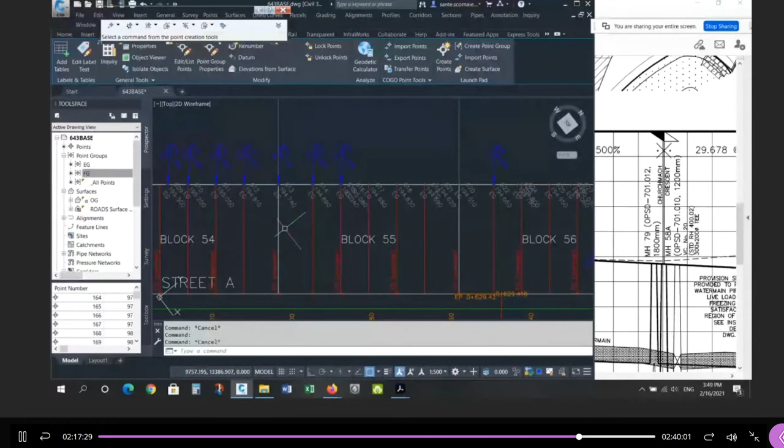to be in my FG group, so that when I build my finished ground surface, I have elevations along the back. These points are not in the FG group. But if you copy and put them on a proposed layer with FG as the description, then they'll be included on the FG surface. These are here for reference. If I want that elevation on my proposed ground, I need a proposed point. Because this is not in the FG group, it won't be on my FG surface.

Okay, so we did that last semester as well. So up here, you're technically interpolating where the distance between points is 0, right? You're not between 2 points, you're right on the mark. Okay, so make sure you do that across here. So interpolate across here, interpolate across here. Again, if you created the corridor model for Leger Way, I would use the Leger Way corridor.

So what's shown on this, on this, where is it? This, right? These, there's actually one here. 1, 2, 3, 4, 5, 6, 7, 8 points can come from the corridor. It could be treated like the red points. Only if you modeled Leger Way.

All right, the colors for the layers based on the PDF image. At the end of the day, and this is for the last assignment at the end of the semester, I'm going to have different layer colors based on the source. So the existing ground gets its own layer. The proposed front gets its own layer. These interpolated values get their own layer.

And then when you do your actual lot grading, right, between front and back, that's another layer, proposed lot layer, right? So there's going to be front proposed, back proposed, and then lot grading proposed. So you're going to have 3 layers for the proposed, but they all go into the same group. And then the existing has its own layer in its own group, just like last semester.

You can have different colors here, but then if you remember in paper space, they'll all have the same color, even though they're on different layers. I like to keep them on different layers, different colors, and that way it's easy to tell whether you've produced it on the correct layer. Okay, so I'll go through this again next week when you have the design done, right? Some of the grading done, so that you can make sure you've organized it correctly. Okay, but it's the same speech I gave you last semester.

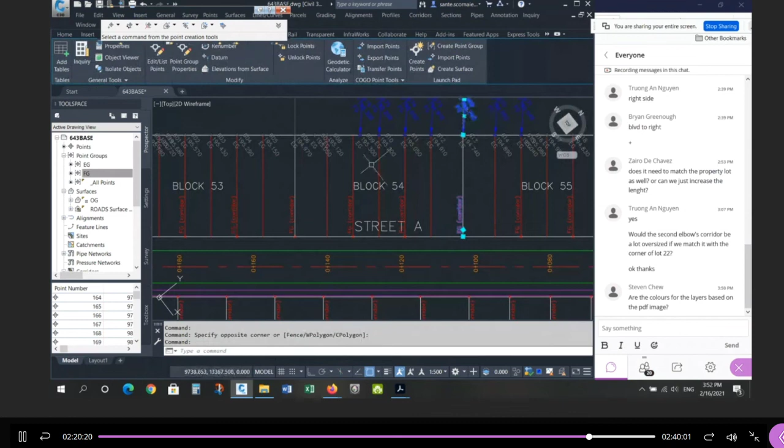So this is just like last semester. You have a condition front, condition back. What do you do in between, right? You have a condition here where you have the front and you have a back. What do you do in between? Here are the setbacks. The front of the house is back 8 meters, just like last semester. Okay. And the house is going to be, what did we use last semester? 12 meters. So the house goes back 12 meters.

So there's your zone for the house. Front of the house, back of the house. So use the same setbacks I taught you last semester. 8 meters to the front, and then from the front to the back, use 12 meters. So your split point has to be here or anywhere in between.

Okay, that should sound familiar, what I just said. Okay? The only piece of the puzzle you don't have is, what do you do back here? What happens back here? How do I get the elevations at the back? Because if I had the elevations along the back, then I'm in business. I have a front, I have a back, I have a front, I have a back. I know what to do in between.

How do I design the backyard of these back-to-back lots? And that's the one situation we didn't have last semester. And that's the last discussion today. I'm just going to tell you what the relationship is, and I just want you to do it. Okay, so I'm going to give you the design concept. You have to put in the points for me.

All right, and there's a sketch. I posted a sketch. It looks like this, rear yard grading sketch. So there's a PDF. I'll show you here. So if you go to the content of the course, it's right here. Winter 2021, rear yard grading sketch. Okay, so this is the concept.

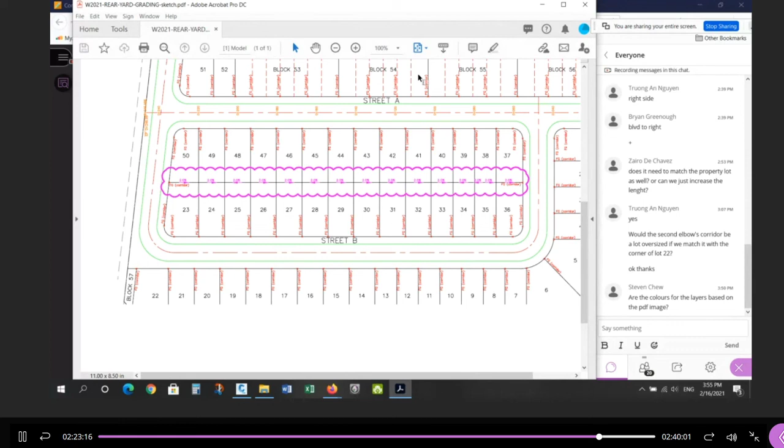Use your slope distance, right? This command here. Go back to the drawing. You're going to use create points, this tool here, slope grade distance. And this is the pattern, right? So I'm giving you the concept. You have to tell me what the elevations are. Starting at this point here, you're going to go down 2% to here. Whatever that solution is, from there you go down 2% to here.

Whatever that is, you go up. This is a high point now. Okay? So the magenta arrows are the direction of flow. They point downhill. So from here to here you go -2. From here to here you go -2. From here to here you go up at +2. And so on. Down 2%, down 2%, up 2%. Down 2%, down 2%, up 2%. You can kind of catch the pattern, right? You go down 2 lots, up 1, down 2 lots, up 1.

When you get to here, right, from here you go up at 2%, stop. Then from here you go up at 2%, stop. And then one time only you use the high-low command. There's a high point right here, somewhere in the back of lot 35 and 38. So the design starts here, you go from here all the way to here, stop. Then you go from here all the way to here, stop. And once you have these two elevations, if you use the high-low command up at 2%, you'll end up with a high point somewhere between this line and this line along the back.

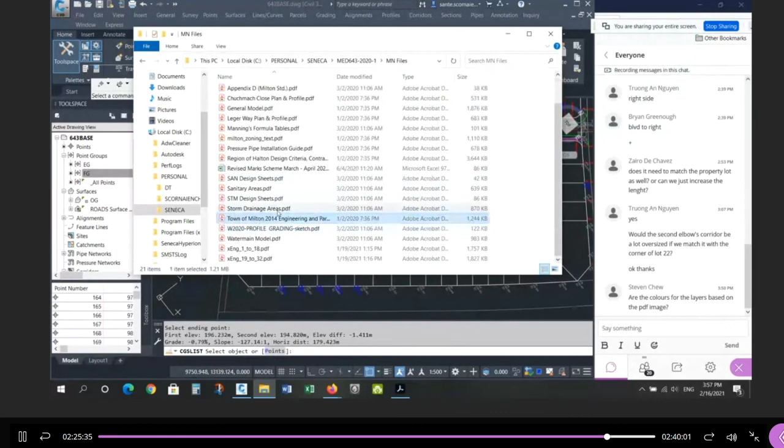Okay. I don't know if Professor Naruzzi discussed this with you, but if you go to the standards for the Town of Milton, and you go to the grading standards, right? Grading, where's the grading? Where's the grading?

Lot grading and drainage. Minimum slope in sodded areas, 2%. So all the swales have to be 2%. Minimum slope in sodded areas, side slopes 3 to 1, but the minimum slope. So to get water to flow on grass, it has to be at least 2%. Okay.

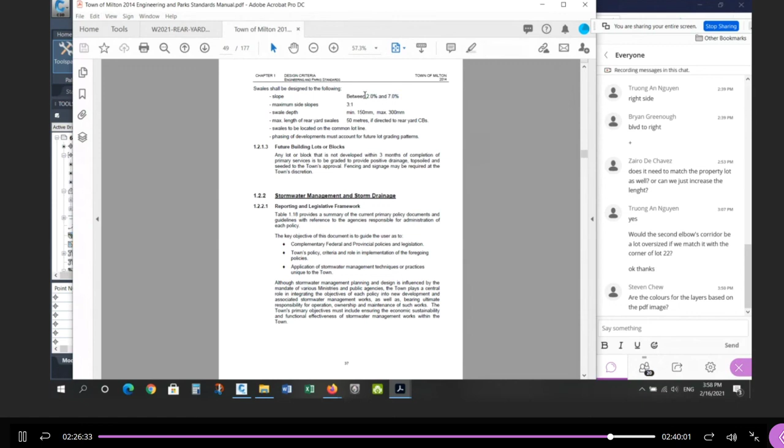Swales. This is what I'm designing in the backyard. Between 2 and 7%, I would have to go minimum 2%. So instead of going down at 0.8% approximately, right? Instead of going down at 0.8%, I'm going to play this trick. I'm going to use the sawtoothing, right?

I'm going to go down 2% for 2 lots, and then up 1 lot at 2%. Then down 2 lots, 2%, then up 1 lot at 2%. And then down 2 lots, up 1 lot. Down 2 lots, up 1 lot. It's actually 1.5 lots, and then down 2%, right?

So again, use the distance command, right? Down 2, up, piggyback all the way to here, stop, and stop there, and then come up from this side 2%, stop, and then use the high-low command between here and here, up at 2% from each side to get this high point. That's the concept. You have to tell me what those elevations are.

Once you do that, you'll have a backyard elevation and a front yard elevation. You know what to do in between, right? Offset 8 meters from the front, offset 12 meters for the house, and there's your zone, right? When you do your high-low, you have to be between these two, right? You could be at the front, you can be at the back, or anywhere in between. That's a solution for a split draining lot. And that's, again, typical of this entire subdivision, okay?

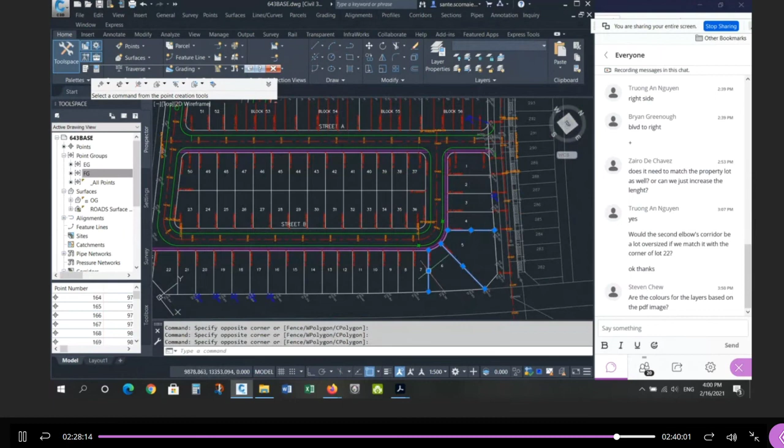These ones are townhouses. They have to be split draining, okay? Because the buildings are too long. You can't flow around, so they have to be split draining. The only exception, like I said, is somewhere in here you might have some back splits. In here you might have some back splits. All right, and that's the lot grading.

Can't do your lot grading until you have all your front lot corners. Can't do your front lot corners until you have a corridor surface. Can't have a corridor surface until you have a corridor model. Can't do a corridor model until you have your profiles designed. The bottleneck is the profiles. Without the profiles, you cannot proceed. Okay, so that's the order.

Do your profiles, do your corridor model, do your corridor surface, get your front lot corners. Then you can import the points, interpolate. You can add the points to the middle between here and here. You can't do that until you have your corridor elevations from the edge here and here. Once you have those two numbers, then you can do the grading based on this concept. Right? So there's the concept.

This is a sketch of the discussion we had at your desk when I came over to tell you to do this work. Right? So now you have an idea of what it should be, make it so. Fill in all the details. You're doing the detailed design. I'm giving you the concept. Okay? Any questions?

So I've taught everything you need to know to proceed with all the lot grading, which is the biggest amount of work to do for this course, right? If you remember from last semester, there's a lot of lot grading to do. Excuse the pun.

Get started on the lot grading, and once you have the lot grading done, you can do the drainage areas, okay? Sanitary, you can kind of do before the lot grading, right? Maybe we'll talk about that next week first, because you don't need the lot grading for it, but you can't do the drainage areas for the subdivision until you know where all your lot grading points are. And you'll see why when we do the discussion. Any questions?

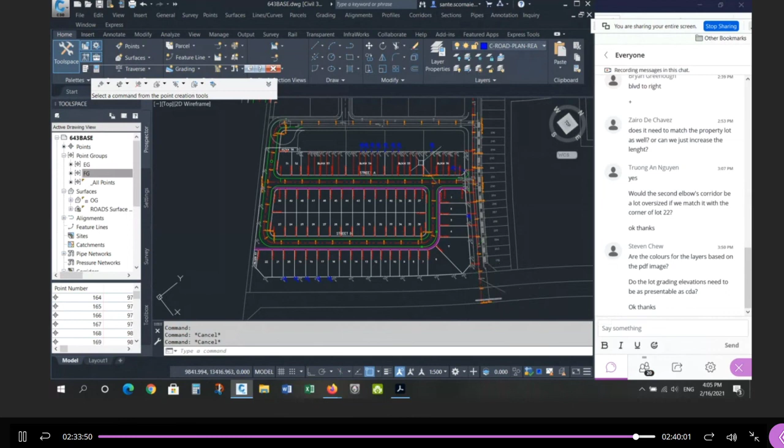Any other questions? Remember, you can unmute yourself. You can ask a question orally. Okay, if there's no other questions, I'm going to end there. Okay, that's a good place to stop.

Next week, we'll discuss the drainage areas for sanitary and storm. And that's pretty much it for this submission. The last thing you need to do is create a surface, right? Which is just as simple as this. Watch. You go to create surface, call it FG. This is the same thing you did in the CDA. Don't create a style. I just want you to create the surface, but I'll show you what it looks like. Right? You don't need a style for this.

And then for that surface called FG, add the point group called FG. And that builds your surface. And you can start to see mine is already kind of coming together, right? My front lot corners, I'll have an elevation at the back and everything in between, right? Okay, so you have to build the FG surface because I'm going to be marking it. I'm going to look at it in 3D and see if everything makes sense.

Okay. Then actually that's all you need to do. Right? We're going to create this. And then it's not even going to be finished until we go to the cost estimate. There's a couple of tweaks you have to make to it, which is not something we're going to discuss now. Okay, so just do the lot grading design, and then we'll talk about the overall. So that's all you have to do. Create the surface, add the point group called FG.

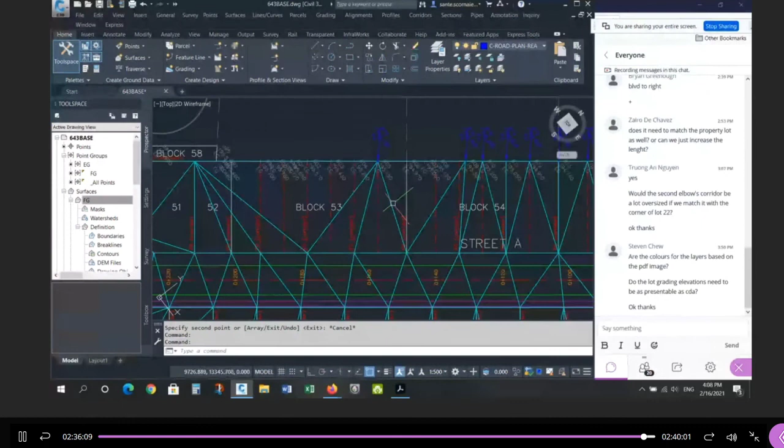So if you want this elevation on the surface, you put a proposed point there. Update your point groups, rebuild your surface, and now that point is on the surface. That's the reason why you need proposed to match existing if that's what your intent is. If the elevations are different, then you know you're proposing a wall, and there's none of that on this site. There's no walls.

Okay, and then I can review the surface. I don't even need to see, just create it, right? And when you give me the file, it's going to be no display, and I'll turn it on and I'll look at it myself.

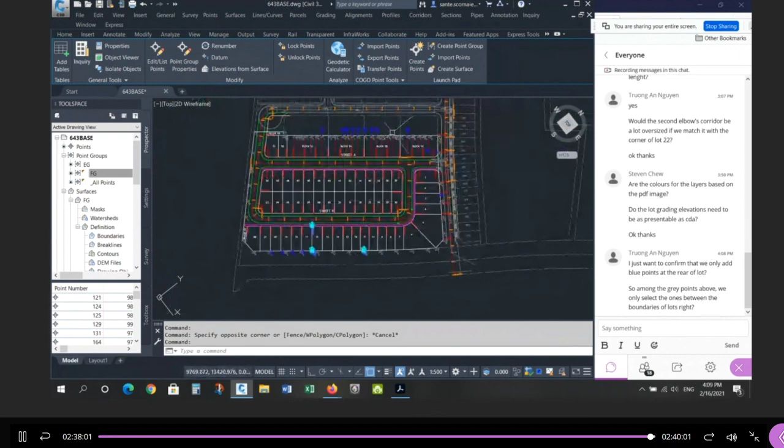Yes, that's a good point, Truong. So if you look here, I did every one. If you look at the diagram that I gave you, the handout, let me go back to that. Where is it? Yeah, if you look at the back here, see how we're skipping? We're not doing every single one at the front. We're doing the block lines and then the ones in between, every other one, right?

So when we're doing townhouses, we don't do every single line. So wherever I have a proposed at the front, you need a proposed at the back. You don't need this one, the blue one here. You don't need something in the middle here. Does that answer your question, Truong? So we're doing proposed at the front, proposed at the back. If there's no proposed here, you don't need a proposed here. Yeah, that's right.

Yeah, that's only true for the townhouses though. I'm skipping the ones on the townhouses. I'm doing every other one, because they're so skinny compared to these. That's enough detail. Okay, but the individual lots have every corner done. Yeah, that's a good point. And I believe that's what they did here. If you look at the townhouses here, they did every other one.

So if you look here, oh no, they did every one. I don't like that. That's too much information. So if I was designing this, I would show the design of this and this, because that's the block limits. But in the middle of the townhouse unit, I would skip this, this, and this. I would only show every other one.